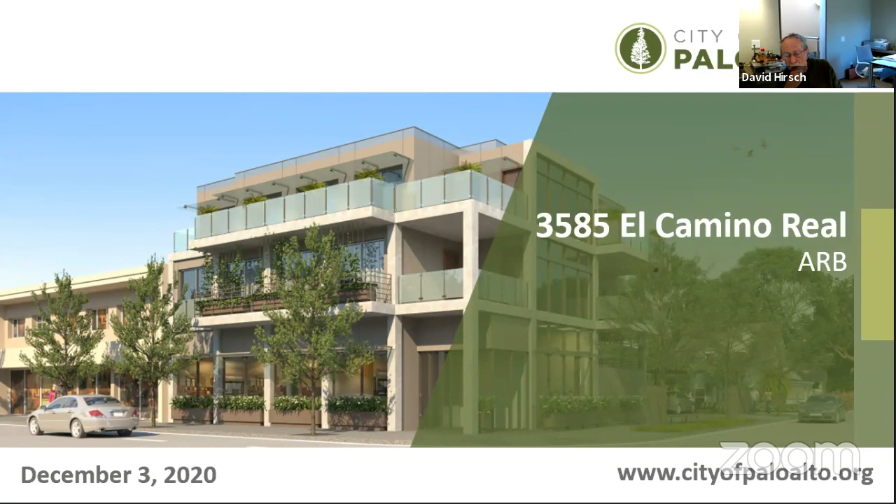Before we do that, I'd like to ask if we have any disclosures from any members of the board. Alex, any disclosures? No. David, disclosures? None. Grace, disclosures? None, except that I looked at the materials board at City Hall. I will disclose that I did spend some time visiting the site and also looking at the material board. Dave, Sheldon, please go ahead. Great, thank you for the introduction. I disclosed that I also visited the site again, and also the board at City Hall. Thank you, David.

Okay, great, so thank you. This is the 3rd time for this project before you, and what we're going to be talking about today is a formal review of a mixed-use project, giving a little background of how we got here, and then some of the changes that the applicant made at the recommendation of the ARB, and then our recommendation.

So the project is located on 0.14 acres, a corner lot at El Camino Real and Matadero Avenue. It's a new 3-story mixed-use building, zoned CN, neighborhood commercial. The project uses the housing incentive program. This will probably be the first project to be approved. You may be aware of another project on San Antonio, but that one needs the ordinance to be in effect, so this will likely be the first one approved using this incentive program.

Requests are for architectural review. The variance has been withdrawn because it's no longer necessary, and we'll talk a little bit more about that. The recommendation is for the ARB to recommend approval to the director.

A bit of background: the project has been before the ARB twice before, in October 2019 and recently in May 2020. Most recently, the ARB provided recommendations to revise the shading exhibit, considering all the trees that affect the shading for the parking lot area, including street trees; to review the size of a second floor 1-bedroom unit, which the ARB thought was too large; to demonstrate more about the base, middle, and top to be consistent with the South El Camino Real guidelines, particularly the top portion of the building; and to consider adding a landscape professional to the team.

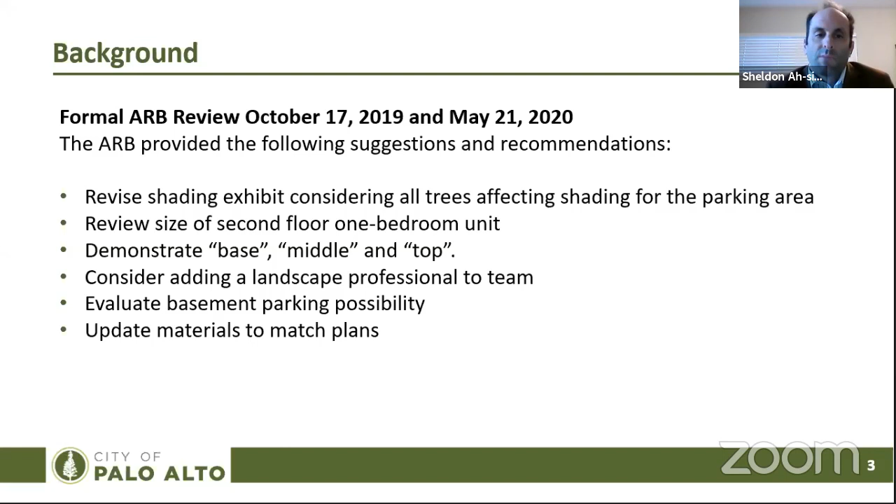Also to evaluate basement parking possibility, and to update materials to match the plans.

A little bit of site context. The site is again a corner lot. It also has an alley to the rear and some overhead utilities. The site is constrained in that manner with these streets. There's also residential right behind along the alley. It's an RM30 site, and in general you have a curb cut there in the front. Those would be eliminated as part of this development project.

A little more about the site context here. The area has a lot more older development, single to 2-story types. You can see another Quonset hut across the street from the project, and there's one also on the site that's partially dismantled. The site was an automobile repair area and was the location of remediation in the past for hazardous materials, which has now been given closure for the site by the county and oversight agencies. So this area, as you can see, is just an area that's maybe going to be in transition over time.

A little bit about the housing incentive program for residential mixed-use projects along El Camino Real, the CN or CS zone. The director may waive requirements if they're consistent with the architectural review findings. So the FAR maximum is not to exceed 1.5 to 1. The base CN in comparison is 1.0, and the maximum lot coverage can be completely waived, whereas the base CN allows up to 50%. So this housing incentive program is intended to produce more housing as an incentive.

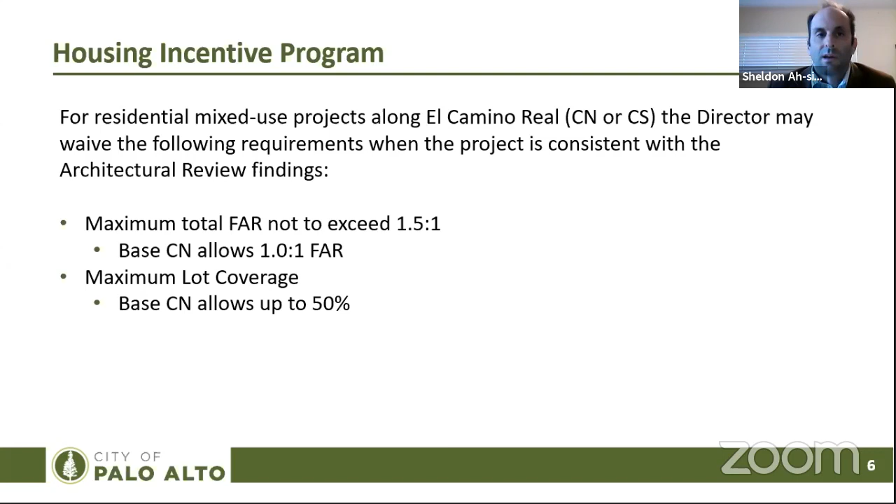For the proposed project, we're looking at a 3-story mixed-use building. The applicant has revised the project and proposes the following: some adjustment to the office square footage upward slightly, and adjusted the square footage of residential units down slightly, making that one large bedroom unit on the second floor a 2-bedroom unit. Also, the applicant added a parapet to address the top issue, and also revised the landscape plan.

So the project does include 0.41 FAR for commercial space and 3 residential units that have 0.71 FAR. So the total FAR is 1.12, just slightly over what would otherwise be allowed, but still under the maximums for the HIP. And the maximum lot coverage is 60%, which is a little over what the base would otherwise be.

Some notable development standards for the district: there's a 12-foot effective sidewalk for El Camino Real. Off the property line is actually about a 5-foot setback, but in total from the faces of curb there's a 12-foot sidewalk. There's also a 5-foot setback for the street along Matadero. That does push the property development envelope in a little towards the property. And then the open space coverage is 35%, as well as the parking lot shade canopy at 50%.

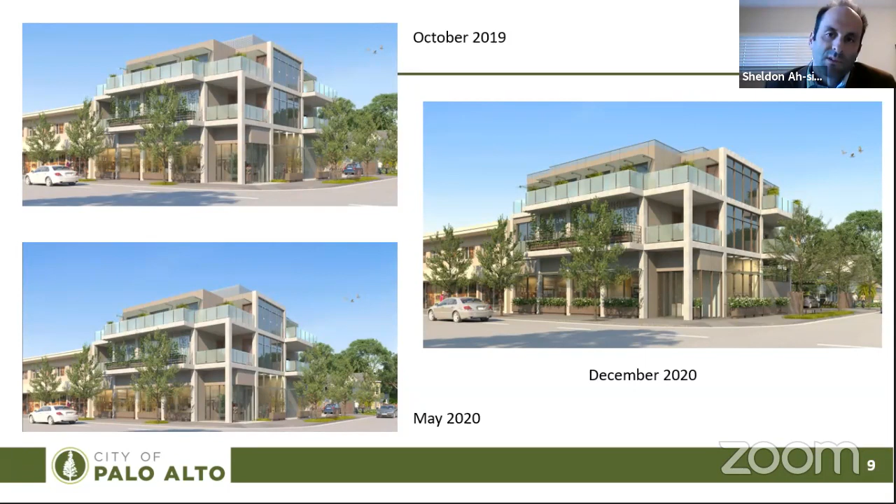This is from El Camino Real, and you can see slightly that Matadero elevation as well. The main changes here would be planters at the ground level, giving a little more base to the project, and then the parapet at the top, where they're using a brushed aluminum cladding. More along Matadero and the alley side, you probably see a little more change, but it's again the parapet and some of the landscaping along the alleyway, which has changed from the Japanese maples to the Western redbud.

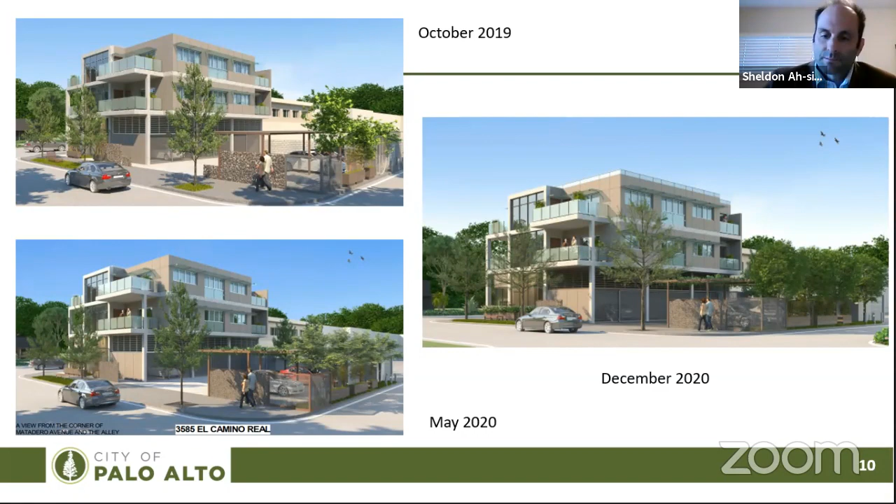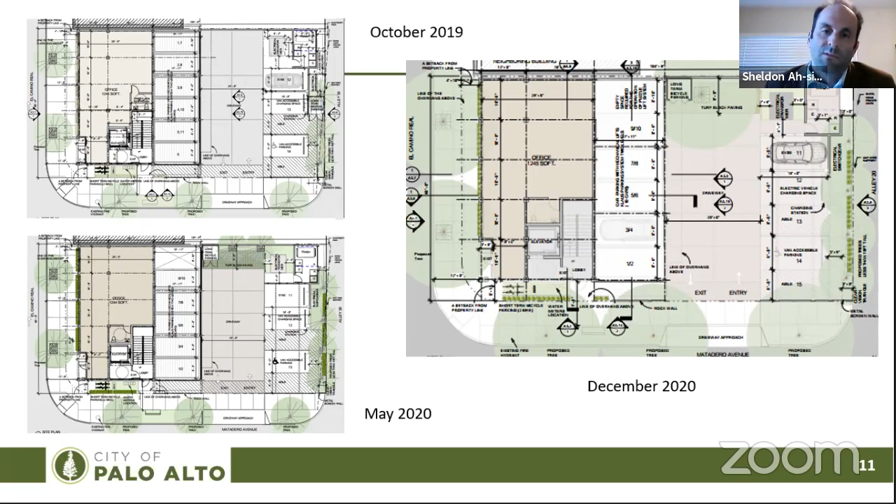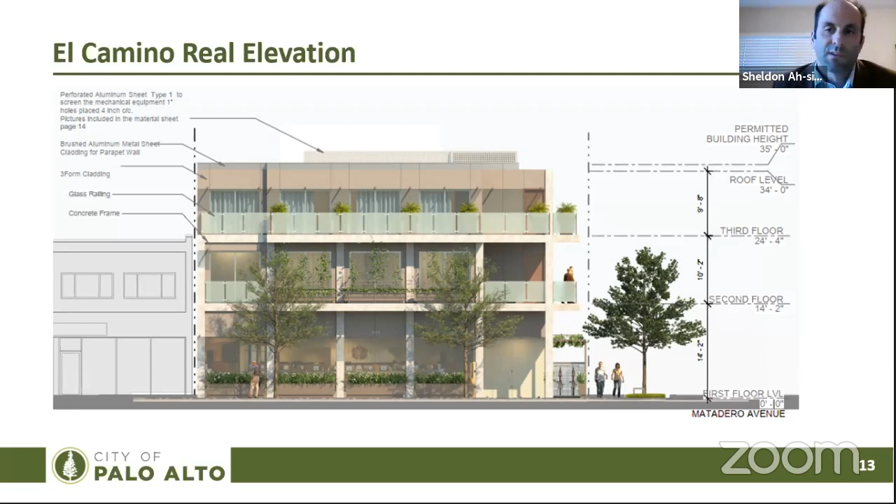Just going to the elevations and the planters at the base of the building here. This is along El Camino Real. You can see where there's concrete frame, glass railings, and 3Form cladding material. The applicant will go a little bit more into their design palette and design intent. Then at the top, you have the brushed aluminum metal cladding for the parapet wall and the perforated aluminum for the mechanical screening. So there's a lot of variety in different materials. We'll have certain slides on those in this presentation.

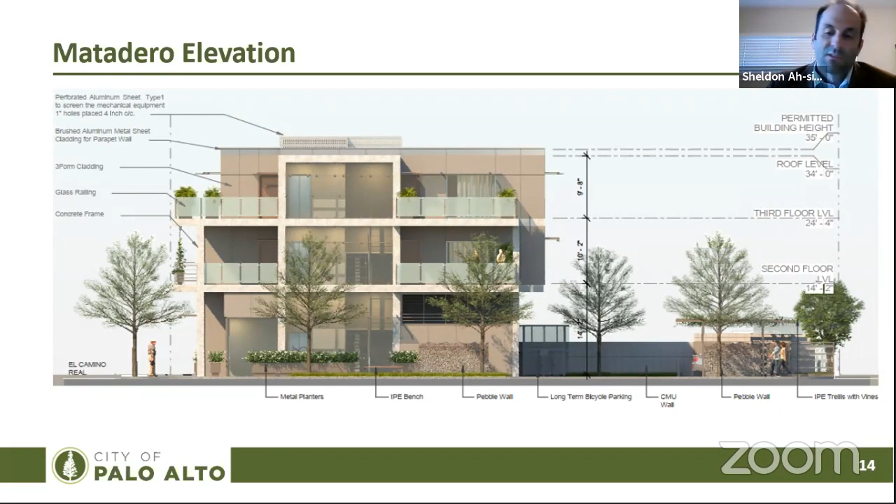Along Matadero continues that same type of palette there. All of this is within the 35-foot height limit. At the elevation here, you see that pebble wall introduced along the rear of the building and the screening of the rear parking lot area. You may also be able to see a little bit of the trellis covering the parking spaces in the back, which has some vines on it as well, trying to achieve that buffering between the property and the alley and the residences nearby.

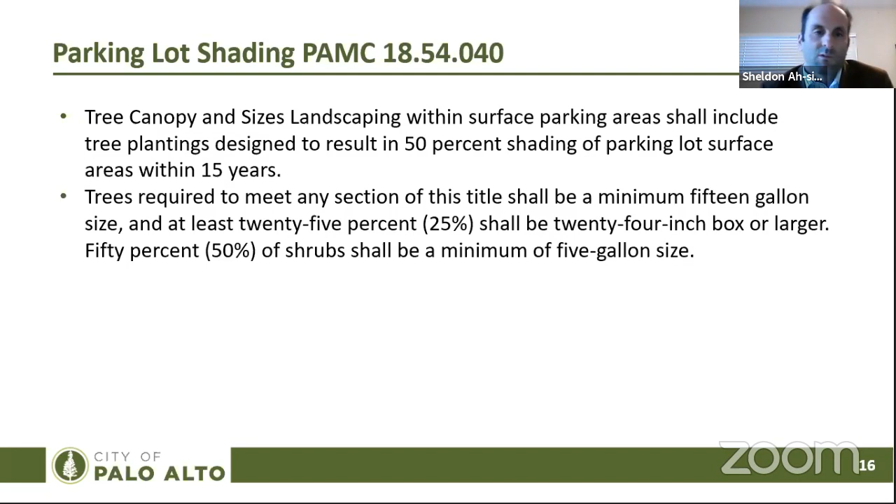One of the things that had to be addressed in previous iterations, having requested a variance, was parking lot shading. The tree canopy and sizes within a surface parking area shall include tree plantings designed to result in 50% shading of the parking lot surface areas within 15 years. There are certain criteria and requirements for types of trees that you can plant to achieve that.

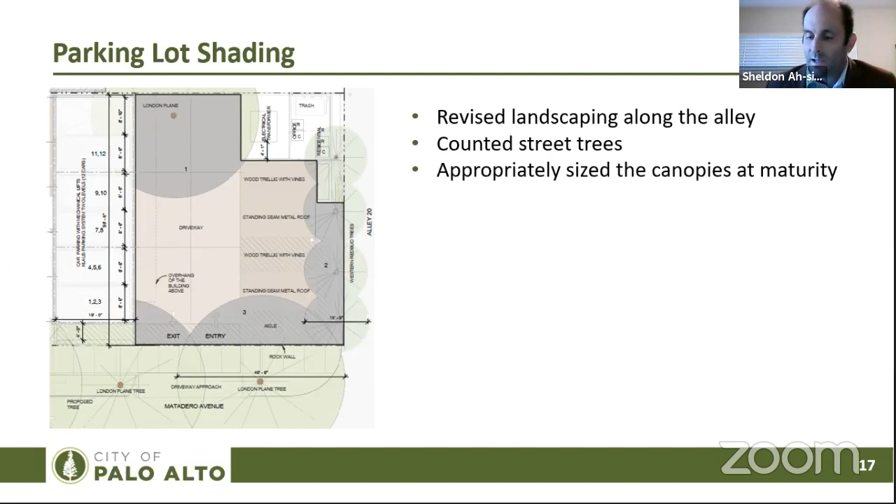What the applicant did, per the recommendation of the board, was bring on a landscape professional to have the plans refined, changing some of the trees in the back from Japanese maples to Western redbud trees, and also adding London plane trees, which have very wide, large canopies especially at maturity. When all this was put together, they did meet the requirement at 50.3%, just barely made it, but we did double check that. So no variance is required for this part of the project.

The other component here is the base, middle, and top, and this comes into play with being consistent with the South El Camino Real guidelines. The base of the building includes the office space, featuring landscape planters, some exposed concrete column frames with concrete slab and glass walls, and the floor to ceiling height is 13 feet.

The middle of the building includes a little more variety here. You've got exposed concrete frames, overhangs for balconies with hanging landscaping, and some solar screening, as well as a floor to ceiling height of 9 feet.

The top is residential use, and it features an 8-foot setback with a 4-foot overhang of the terrace. It includes three-form cladding and operable windows and doors. The very top includes a 1-foot parapet wall with brushed aluminum cladding and coping, and the very top of the roof includes mechanical equipment screened with perforated aluminum screen.

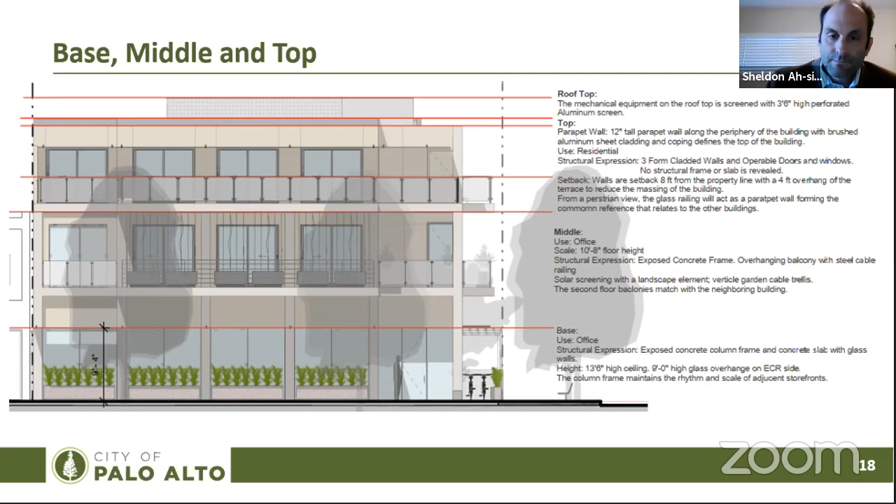One of the other topics was to look at whether or not you could put the parking underground. There's an attachment that includes some diagrams - these are some different diagrams, more detailed ones. The applicant, along the way throughout this project, has provided a lot of different iterations for this basement, addressing some of the staff's as well as ARB's comments.

As you look here, this site is 104 feet by 60 feet, and you have setbacks in the front along El Camino Real that need to be maintained. Those transcend not only at the ground level, but go down below ground when you're considering basement development. It also has a 5-foot setback along Matadero.

And then what can we do with it? Well, once you lay that out and try to fit, we can really just do a one-way ramp down. That's not the code. And in doing so, when you're making that turn at the bottom of that ramp, it's not possible without going into the setback. So that's another deviation there. You need another deviation to go into the street side yard setback.

And then once we figure this out, how to get into here, this area, where do we put the parking? They put a little example here of some stackers. These stackers, I think, are 9 stackers. It's very difficult to see how this would really fit. Maybe you could orient these a different direction. Then trying to get to the top level, you need to have an elevator and a stairway. They put that in the rear of the property.

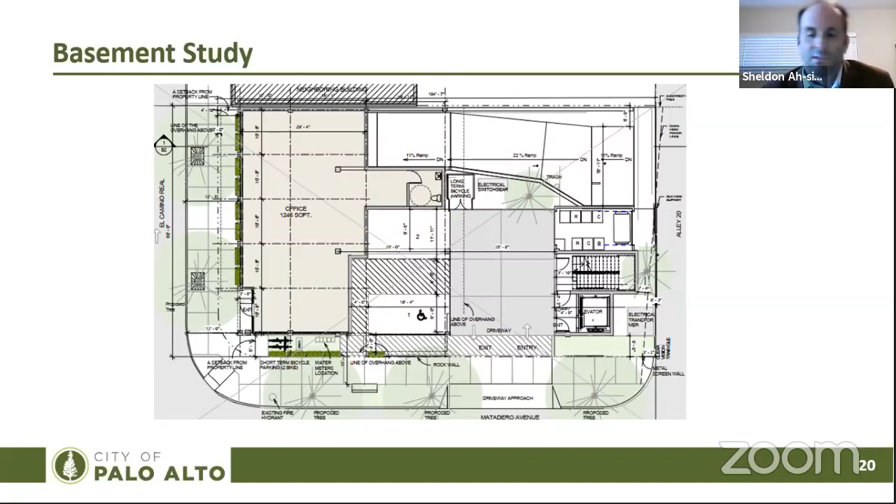And this is just the cross section of what that looks like. Maybe you can put some parking underneath the ramp. It's very limited. You have to put a pit to go down more. So there's just a lot of different things that make this not a feasible solution.

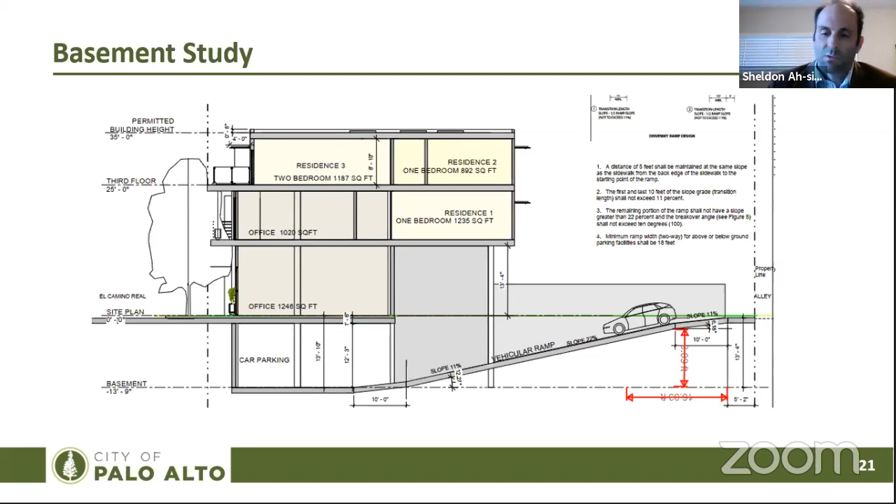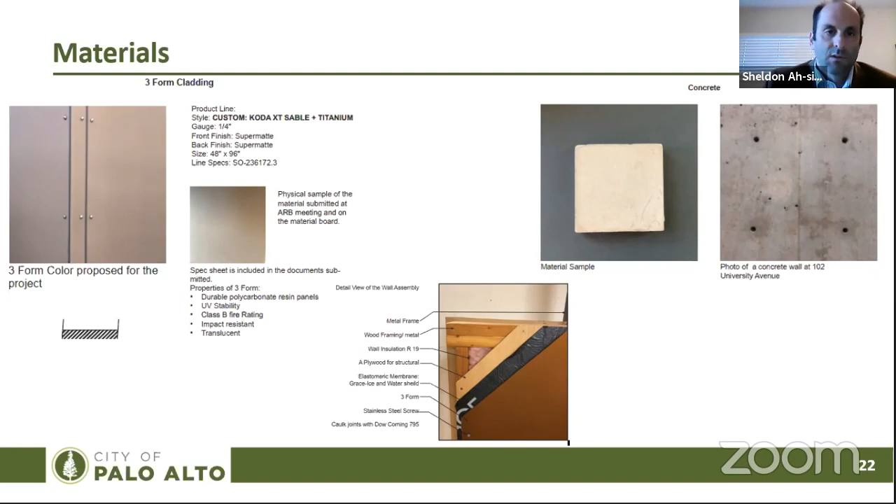Going into the materials here, and the applicant will go a little bit more into this, but just to provide it here, some of the different materials. There's a lot of variety being used throughout the elevations, as well as for the little details here, the glass railings, glass overhangs, and how that's attached to the building. The long-term bicycle parking has some stainless steel panels.

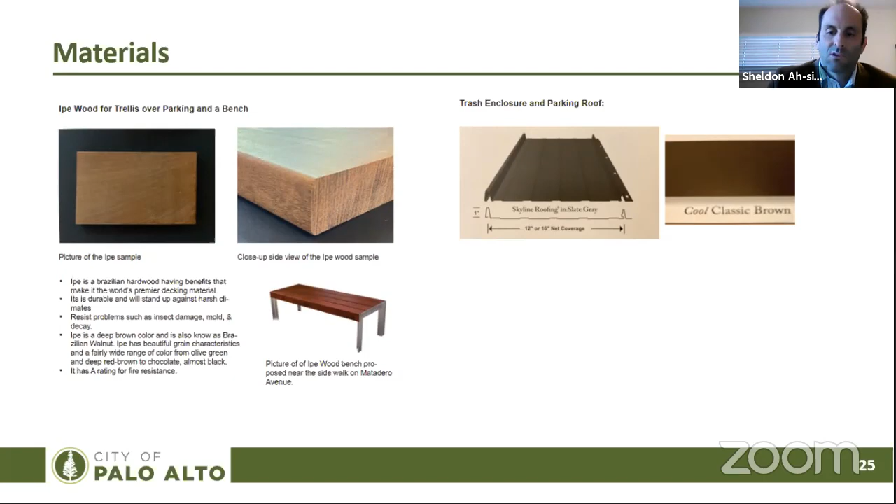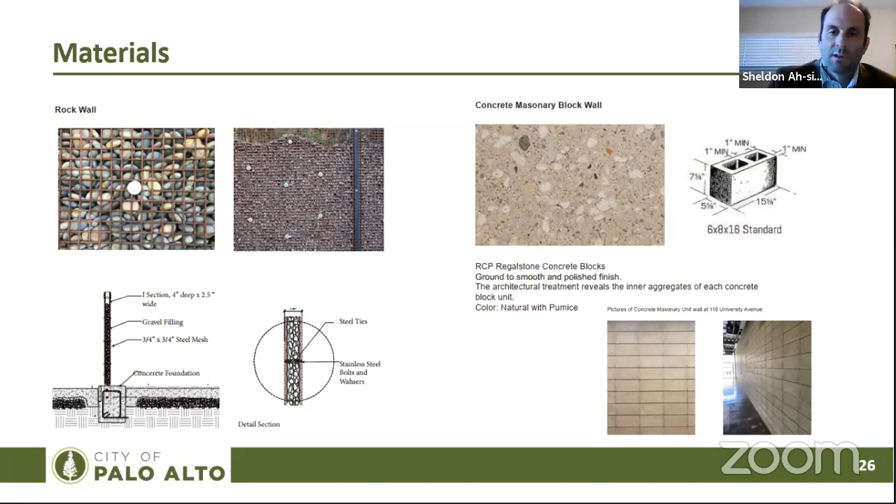There's wood that's being used as well for the project. There's a bench, there's a trellis, the rooftop has a metal as well as the trash enclosure. There's a pebble wall that's being used along the perimeter towards the rear and the alley of the building. And then there's a masonry block wall that's being used for the enclosure, the trash. The mechanical equipment is also screened. You can see how the holes are situated. So it should provide that screening so you won't be able to see the equipment. And the planters are the metal type of planters there.

So some other issues, miscellaneous, the below market rate housing, the project will make an in lieu payment. The mechanical lift parking, there's a condition regarding operations and maintenance. For CEQA, the project required a mitigated negative declaration that circulated earlier in the year. Some of the impacted topics included air quality, biological resources, cultural resources, hazardous materials, and noise. And there were mitigations that were proposed to reduce these impacts to less than significant.

So in conclusion, we want the board to conduct a public hearing. The project does respond to the ARB comments. The project is consistent with the architectural review findings. We do want to note that there's finding number 1 that we just want to make a change there. It's on page 19 of the packet. The sentence right before finding number 2, so it's the last sentence. We need to revise to strike out the last part of that sentence since the project does not require a variance. Project is consistent with the code as proposed.

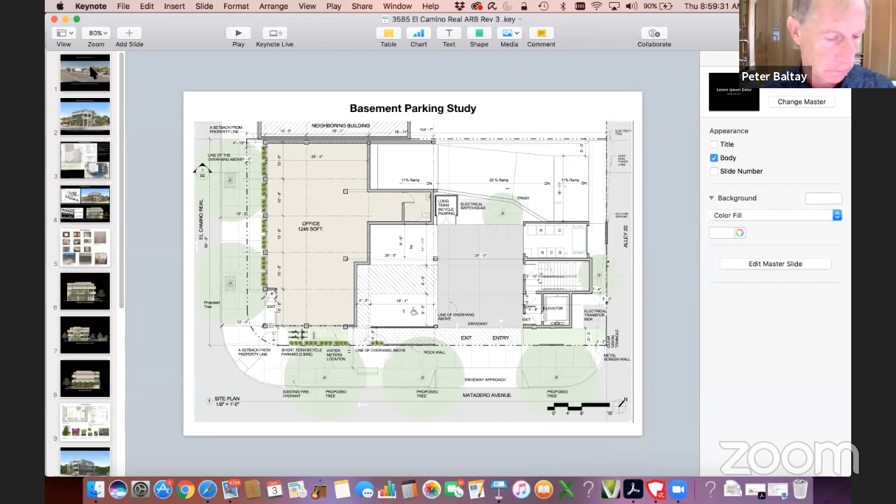Are you able to see my screen? We are able to see your screen. Please go ahead. My name is Pratima Shah, I'm the lead architect on this project. Good morning, Architectural Review Board members, planning staff, Jody and Sheldon.

Thank you for reviewing our building design proposal. We appreciate the thorough staff report and detailed presentation by Sheldon. This is our third formal presentation before ARB. We appreciate the review and comments. The revisions made to the design in response to these comments have assisted with building design enhancement. The project site has been vacant and in dilapidated condition for the last 30 years.

We, Paloma Architects, together with KSS Management, are proposing a 3-story mixed-use building with office spaces on 1st and 2nd floor, and 3 residences on 2nd and 3rd floor. There are 2 double-bedroom units and 1 single-bedroom residential unit. As you are familiar with the design proposal, I will focus my presentation on the revisions and responses to ARB comments from previous hearings.

First important topic is parking area shading. The revised design proposal has 4 western redbud trees along the alley and 3 London plane trees. These trees provide shading of the parking area and fulfill the requirement of 50% shading with trees. The project does not need a variance.

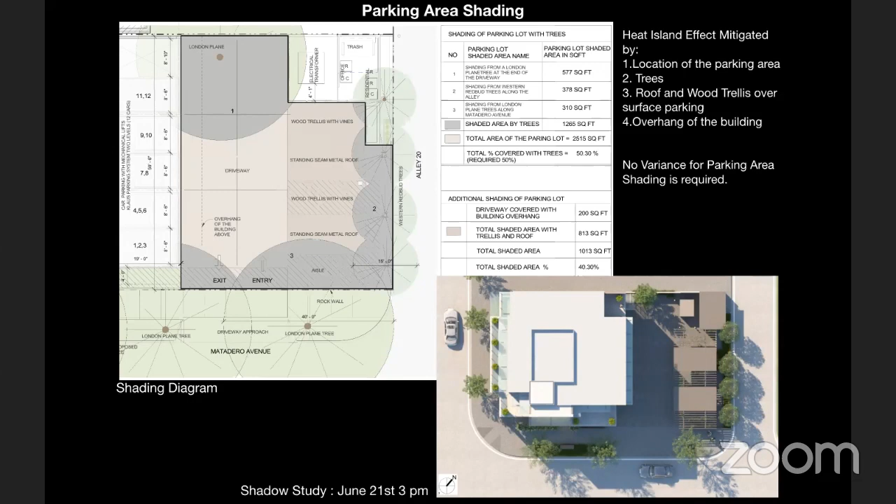Articulated facade. A 12-inch parapet wall has been added along the periphery of the building on the roof, cladded with a brushed aluminum sheet. The parapet with cladding defines and articulates the top of the building. Brushed aluminum panels have been part of the building material palette of this project, similar to 3-form cladding. The revision is aligned with Palo Alto Municipal Code and El Camino Real guidelines. The proposed building has a well-articulated facade with storefronts, glass overhangs, balconies, terraces, and operable doors and windows.

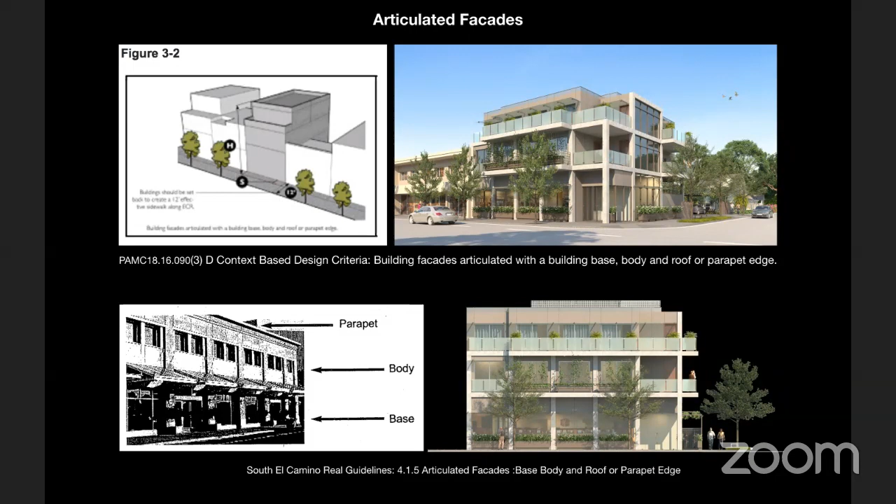The third floor walls have been set back 8 feet to reduce the massing of the building and complement the neighboring 2-story buildings. The building form also expresses the use of the space. On the ground floor, concrete columns and glass storefronts maintain the rhythm and scale of the neighboring storefronts. The second floor office space has a balcony with vertical screen garden, providing a beautiful view and shading. The third floor walls are recessed 8 feet, creating terraces for residential use and providing privacy for residential spaces.

Materials. A detailed material sheet, which includes brief specifications, material pictures, and construction details, has been submitted in the package. There is no change from the previous material, just an addition of aluminum sheet cladding for the parapet wall.

There are 2 different types of screens used in this project. The screen used for screening mechanical equipment on the roof is made up of perforated aluminum sheet, which has 1-inch diameter holes placed 4-inch center to center. This will screen the equipment properly. The other screen used is for bicycle parking and is made up of stainless steel with smaller holes and 40% openness. 3-form color samples and pictures are included, which are consistent with the colors in the rendering.

With this revision, we have submitted photorealistic rendered elevations that show the material color, texture, and its location in the building precisely. The next couple of slides show rendered elevations. The building has honest expression of concrete structural frame, and the palette is really minimal, with concrete, steel, and glass as main structural materials, and 3-form and aluminum for cladding.

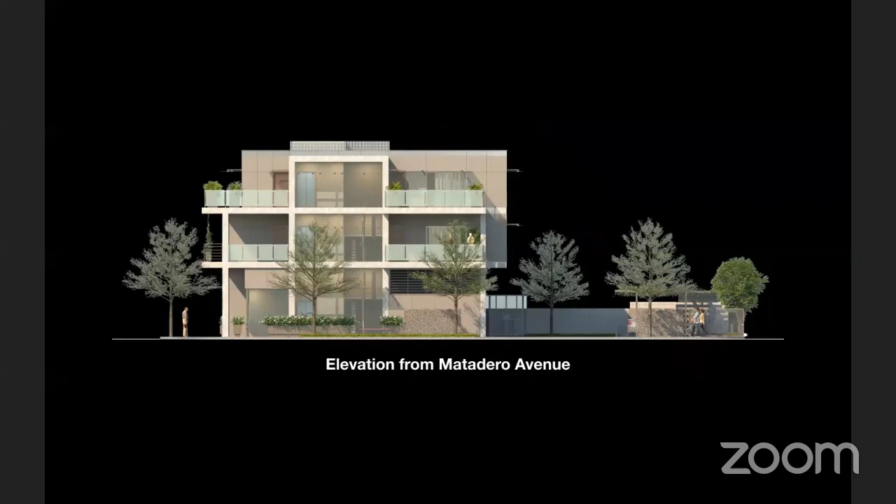Landscape design. The landscape design has been revised after consultation with architect Annie Huang. There is no existing tree on the sidewalk or on the property. We are providing a total of 5 London plane trees on the sidewalks and 1 at the end of the driveway.

Japanese maple trees have been replaced with 4 Western redbud trees, which are native, drought tolerant, and ornamental. They grow around 15 feet tall, satisfying the constraint of overhead electrical cables along the alley. A landscape planting strip with 4 Western redbud trees, shrubs, and bamboo planters along the alley acts as a buffer and screen between the proposed building and the residential apartments.

A vehicular parking area on grade is partially covered with Ipe wood trellis and flowering creepers, which will provide shade to the parked cars as well as create beautiful views for the residents and the neighbors.

Metal planters with African iris plant have been proposed along El Camino Real and Matadero Avenue. The planters with beautiful iris plant will enhance the pedestrian experience as well as provide a screen and a view to occupants. African iris is a drought tolerant and robust perennial with great aesthetic value and easy care.

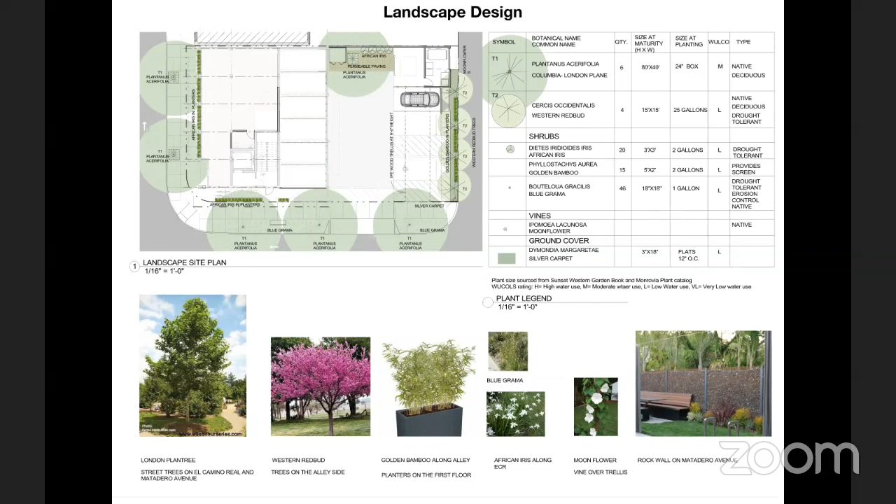On the second floor balcony on the El Camino side, a vertical screen garden has been proposed. A cable trellis system will guide creepers potted in the balcony planters. The creepers and cables will create a beautiful garden screen with an interesting view and make urban space more livable. It will also help reduce solar gain, mitigating noise and dust.

Most of the proposed landscape elements can be seen in the rear view from the corner of Matadero Avenue and the alley.

There is a little change in the program on the second floor. A 1-bedroom unit on the second floor has been converted to a 1,240 square foot 2-bedroom unit. 2 car parking spaces have been required for this unit in the mechanical elevator lift system.

The project fulfills parking requirements. Guest parking is not required, but a shared parking program can assist with guest parking for residential uses. The surface parking spaces allocated for office use can be shared with the residences after business hours for guest parking.

Regarding subterranean parking, a detailed study, a comparison of parking solutions, and multiple design options have been submitted to the planning department, including a 1-way ramp with stackers, a 2-way ramp with stackers, and a 1-way driveway with a jog.

Even with a 1-way ramp, the maximum permitted slope and 180-degree turning radius for cars could not be accommodated. Despite proposing a full 6,000 square foot basement, we were able to accommodate only 3 car parking spaces in the basement.

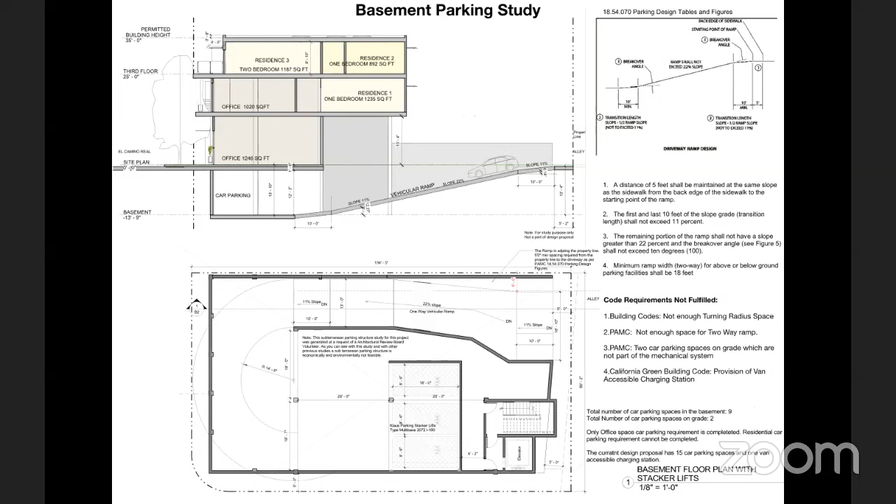Thank you, Pratima. Should I need to?

Good morning, ARB members. First of all, I appreciate the time that you spend. It's really well appreciated. I did 2 terms on the ARB, and I think it's very helpful.

Let's see. I've designed a few hundred thousand square feet of buildings, commercial buildings on El Camino, as well as major downtown Palo Alto buildings. I've designed shopping centers. So we have a wide range of projects we've worked on.

But it gives me immense pleasure to present a mixed-use building on this 60-foot micro site. Most of you understand that is the size of a single-family residential site in Palo Alto. The project has, as I mentioned, a small site, and we did have remediated soil that is cleaned up now. The site is clean.

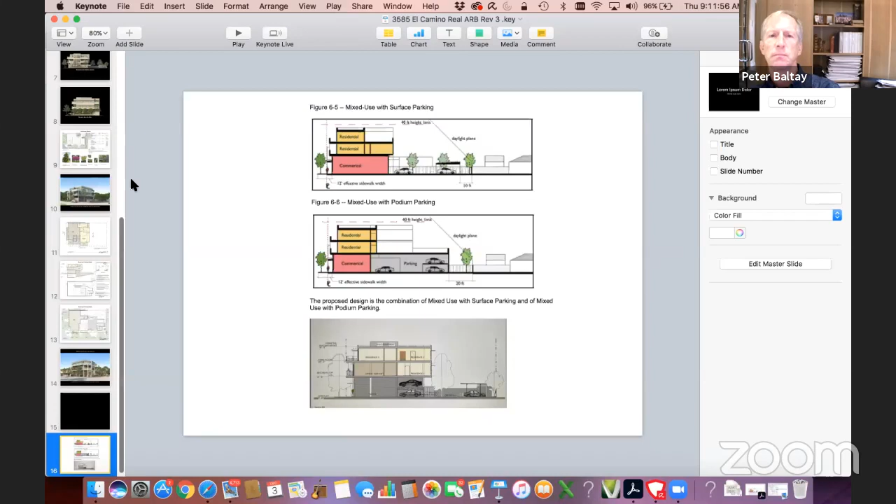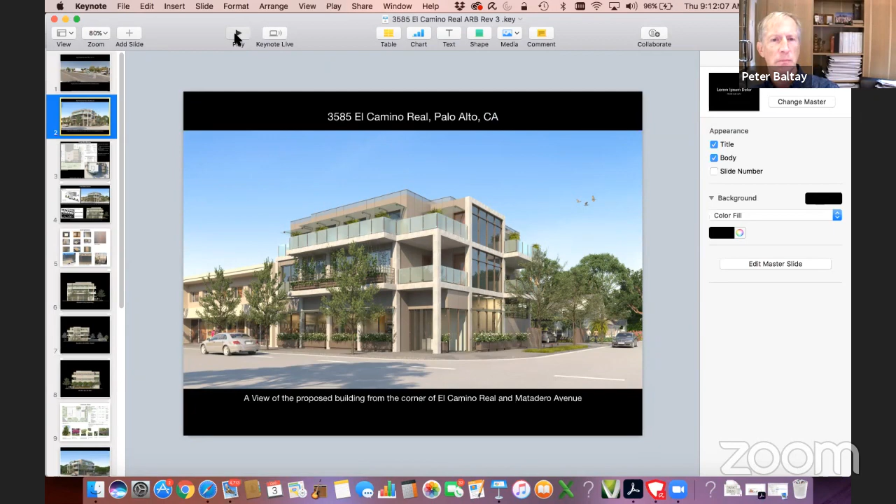Jody briefly steps away and returns, confirming the request to read Ozma's comments into the record. She locates the email Ozma sent to Jody Gerhardt that morning and prepares to read it.

Jody reads Ozma's comments: on this project, the design is lacking granular detail and warmth. The effort to articulate the top of the building through a change in material on the parapet is ineffective at defining the top and appears slightly out of place. A change in plane could bring more definition but might also clash with the language of the rest of the building.

The top story appears as one big wall element without much relief and could benefit from a material or textural change across the whole top story, since altering just the thin silver band of the parapet doesn't help the scale of the building overall. Similarly, a change in material for one of the stories, instead of the same material on every floor, would reduce the monotony of the mass. For these reasons, Ozma could not make finding number 2 and would not recommend approval.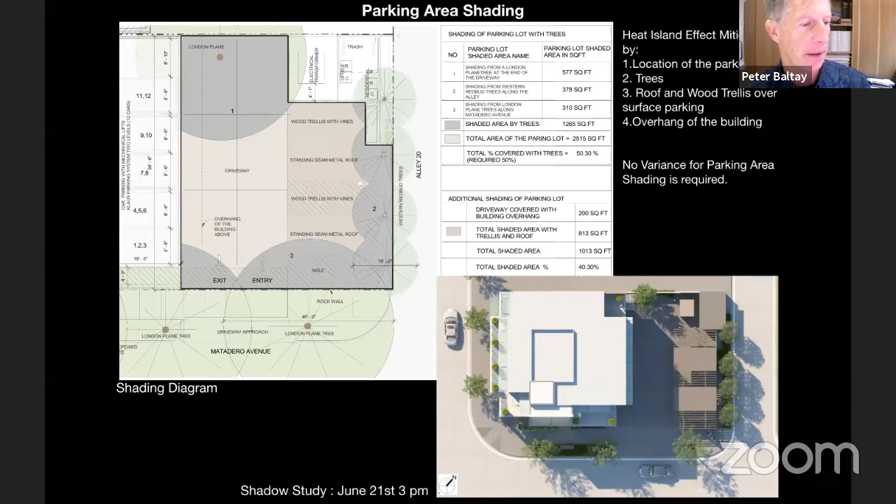Chair Baltay? Yes. Is it possible to ask the applicant where they think those closets may go? Because I think if they're interior, that would be fine for staff to handle, but we wouldn't want them maybe changing the exterior windows.

Let's come back to that though, see if the rest of the board has any concern about it even, because I don't want to drag this out if it's just my thing. The closets themselves are not our concern. I'm bringing it up just because Alex had mentioned, I think appropriately, that the proper unit size would require an extra parking place, which they seem to have accommodated.

My other thought is to really address the issue of base middle top. That's something we've all been discussing and thinking about. At a high level, I think this building exemplifies why it's important in our objective design standards that we have some way to evaluate buildings without such a rigid criteria like a base, a middle, and a top. This is, I believe, a building that fits in well with its environment and the streetscape on El Camino, and is clearly well articulated and beautifully designed.

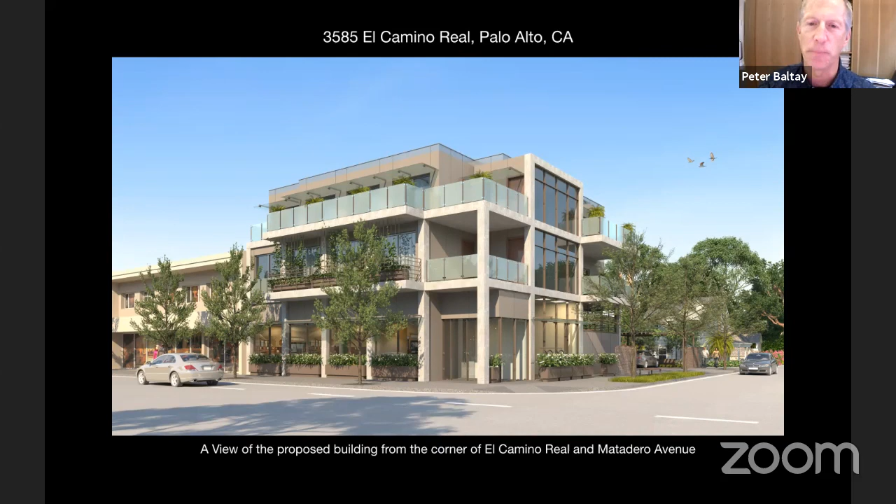But I don't believe it has a base, middle, and top of the formal traditional sense. I don't think the one-foot parapet screen on the top can really be called a parapet or a top. It would need a lot more planar definition to really make it do that, as Osma pointed out. However, the real purpose behind the base, middle, and top is to ensure buildings have sufficient articulation and really to help them relate to other buildings on the street and in the plane.

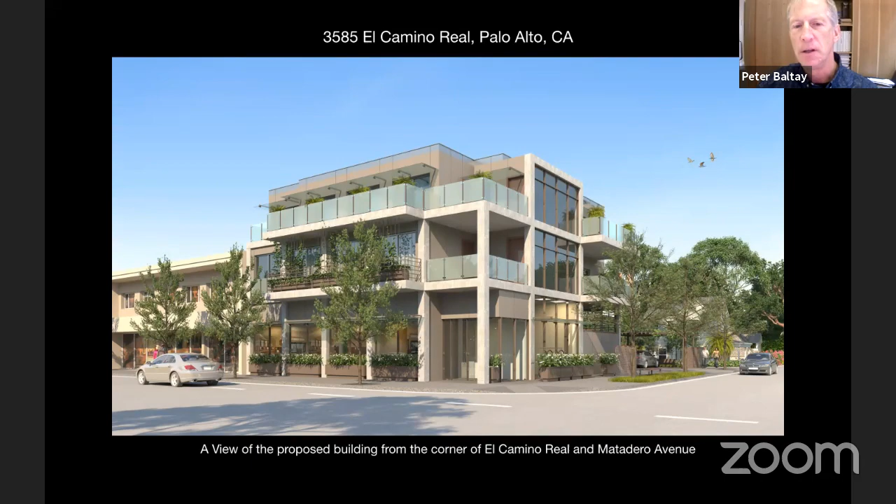I think this building, by setting the concrete frame, relates to the rest of the buildings along the street, and it just fits right in with my gut feeling of Palo Alto. You can see Joe Bellomo's been around a long time, and he gets what El Camino looks like, and the building fits. It just goes right in there with the way the frame is done.

And I think that does the purpose of the parapet. Really it's the second floor overhang with the glass wall, I think, is the top in that formal sense, and the upper piece is recessed back. Clearly the building is well articulated with the openings in the frame, the ins and outs, and the way the doors are put at the corner.

So I can support this building as meeting the intent of the South El Camino Real design guidelines, and I can support recommending approval. I do support Alex's request for a subcommittee to review a few of those items. With that, David, why don't you speak?

Okay, thank you. Sheldon, that's a very nice initial presentation. Congratulations to the client's method of describing it this time, very succinct and to the point on every item that has been raised, including your latest presentation, which is also complete. I have to take a different tack because Grace stole every thunder from this descriptive part of the project here.

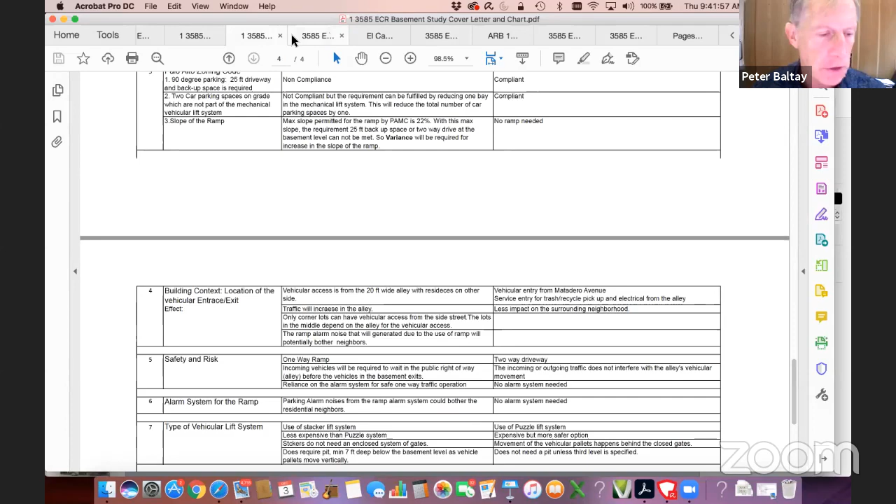I'm open to the subcommittee approach. I'm also open to coming back to planning staff to review. But it sounds like in this group, there's a move towards the subcommittee approach. David, what's your opinion about the items Alex suggested?

I've been pretty happy with the degree of detail on the project as it is. If there's one or two that Alex feels strongly about, certainly I have no problem with it coming back to committee.

Let's be clear about the point I brought up about the closets and the layout. My concern is not whether they even have closets or where they come from, but rather if they come back with a change on the floor plan, what should staff do? At what point do they come back to us or to a subcommittee? I think it's incumbent upon us to give them clear guidance, especially since my guess is they're going to make a change on that sooner or later.

So we could bring up the plans and ask the applicant for some opinion. But if we were to say, look, any change that affects the positioning of windows, then we want to see it. And we don't want to see the parking count reduced, even if they cut back a bedroom. Is that a fair statement to leave as the position of the board? Grace, what do you think?

Well, I think it's not really within our purview. However, planning staff would definitely come back to us in any case, right, if elevations are changed.

Well, we're just trying to make it easier for them so the guidelines are set. That's why I'm bringing it up. I could go along with the statement that if there's any change in elevation, it should be brought to our attention somehow, if that's a motion you would like to make.

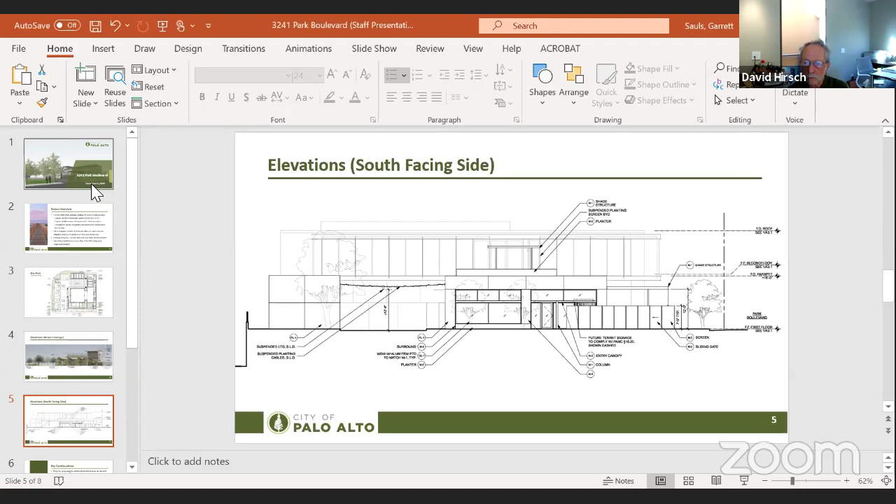Good morning, board members. My name is Garrett, I am the project planner for this application. The site is 3241 Park Boulevard, an existing building that is being partially torn down and remodeled, adjacent to the Fry's Electronics site within the future North Ventura Coordinated Area Plan area. The project is proposing a 2-story R&D and office building totaling about 7,861 square feet.

They'll have 2 parking lifts with a total of 21 spaces, basically bringing the site into compliance with our code requirements. In addition, they'll provide 5 bicycle spaces on the site with 4 long-term spaces and 1 short-term space. The proposed landscaping will provide at least a 55% canopy over the parking area, exceeding our 50% requirement over the next 15 years.

The site, given that it was previously used as an auto service facility, had some chemicals that had intruded into the ground as a result. A soil investigation included in your packet demonstrated that a soil vapor mitigation system would be required. Staff has been in communication with the applicant, the Department of Toxic Substances Control, and the Regional Water Quality Control Board to start that process and get the necessary documents prepared once this project is approved.

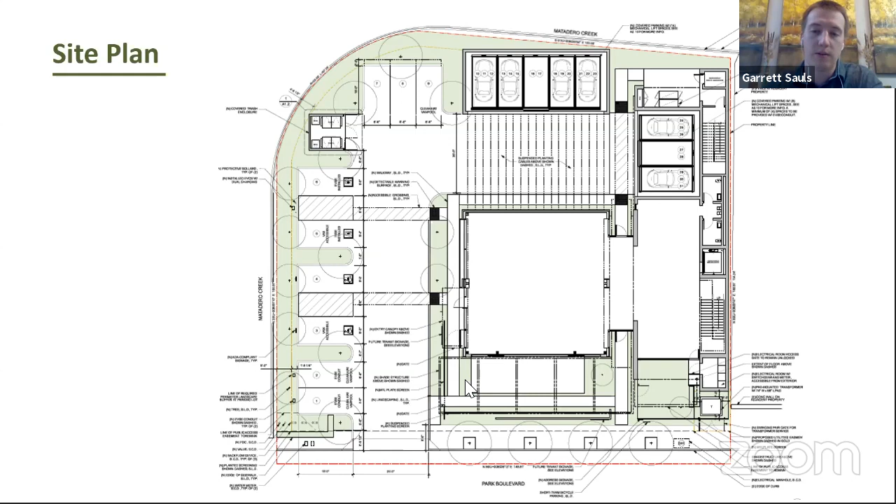On the site plan, you can see the 9 parking spaces along the street at ground level, plus the remaining 21 spaces in the 2 parking lifts along the side. This front area is a gathering space for the tenants of the building, shrouded by a planter wall. You see a smaller planter below, and further beyond it this planter wall, which screens it from view while also providing space for air flow so it doesn't become a stodgy area.

So while it may seem at this point it's further away, if you come 3-dimensionally towards it, or have that structure moving closer, it would actually get a little closer to this retaining wall you see along the left-hand side. You also see here they have a proposed second floor amenity area.

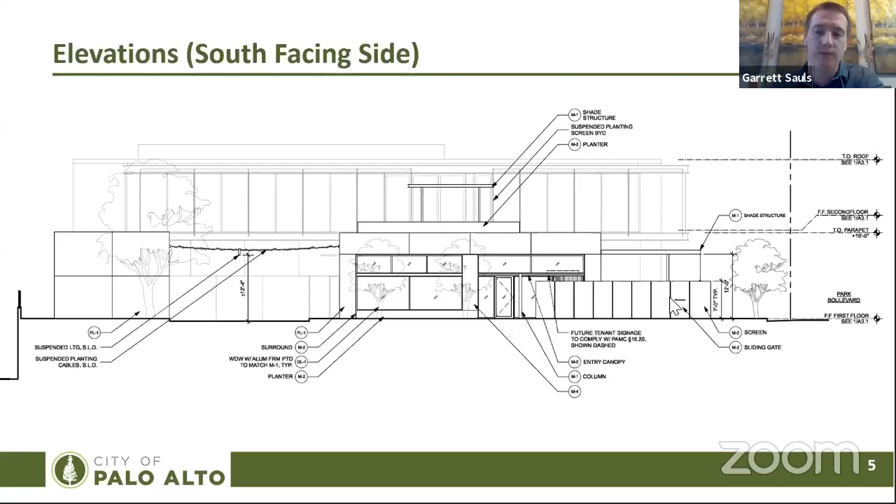Some key considerations for the project: there are currently 3 existing street trees on site, which they're proposing to remove and replace with 20 trees in total. They would be exceeding the urban forestry requirements for tree replacement, while also placing a majority of native species on the site, which you'll see on the landscape plans submitted in the staff report.

In general, the project is well composed and designed. There was a portion along the southern wall facing towards the substation that staff wanted the ARB to weigh in on, to say whether they felt that area needed any additional treatment, or if the design proposed is sufficient.

The reason for them having a 2-story wall is fairly understandable. They have an adjacent substation, which is not necessarily the most appealing thing to look at. So the applicant has indicated their intention is to screen that facility from the tenants' view.

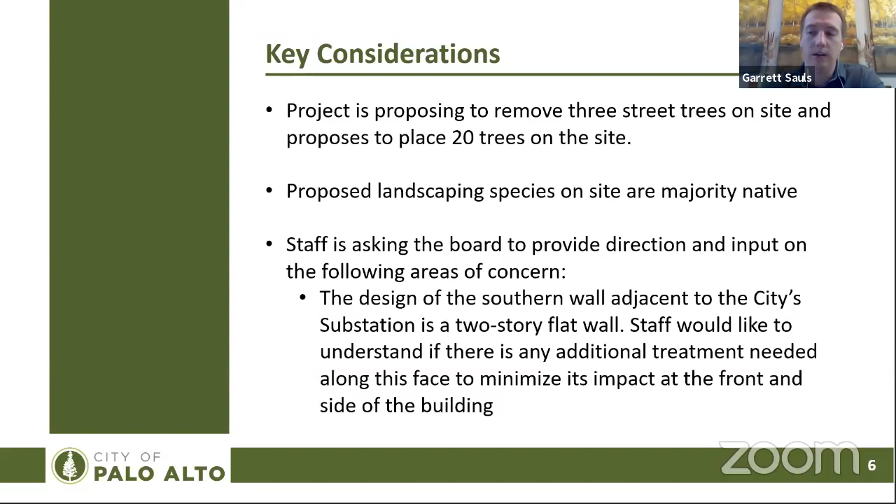As you all had mentioned, this is an example of the material boards. They are proposing to use a smooth-trowel integral cement plaster along the wall, along the majority of the building, while also utilizing painted metal to help break up the massing of the building, and clear glass along the site to give it an openness.

Lastly, staff is recommending the ARB recommend approval of the project and provide any direction they feel is necessary. And that concludes my presentation.

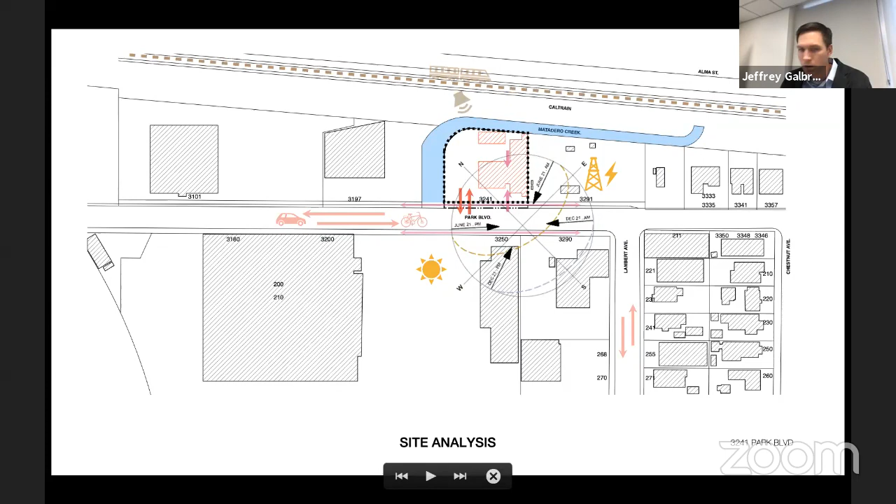In terms of zoning, the site is zoned GM, as are the adjacent parcels to the north along Park Boulevard. The Fry's site across the street is RM30, and kitty corner to the site on the corner of Park and Lambert there's a CS zone parcel, as well as the parcels on the north side of Lambert. Transitioning south from Lambert begins the R1 South Ventura residential area, so we're a bit of a transition point.

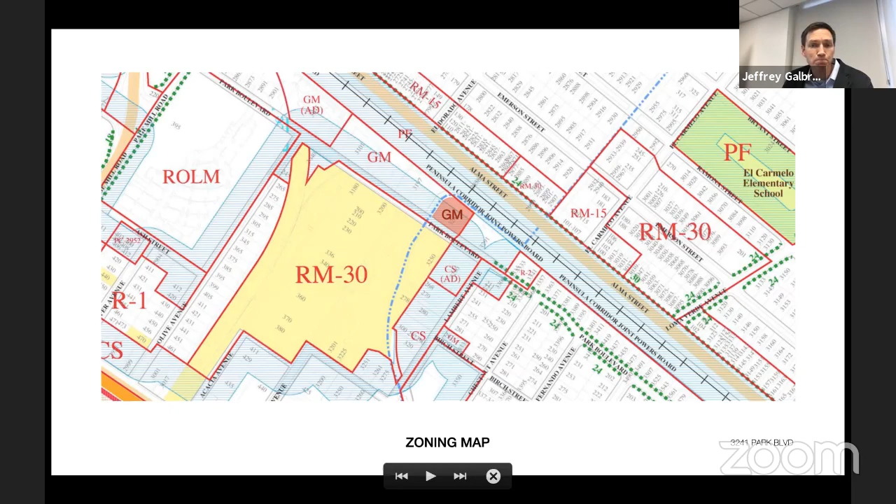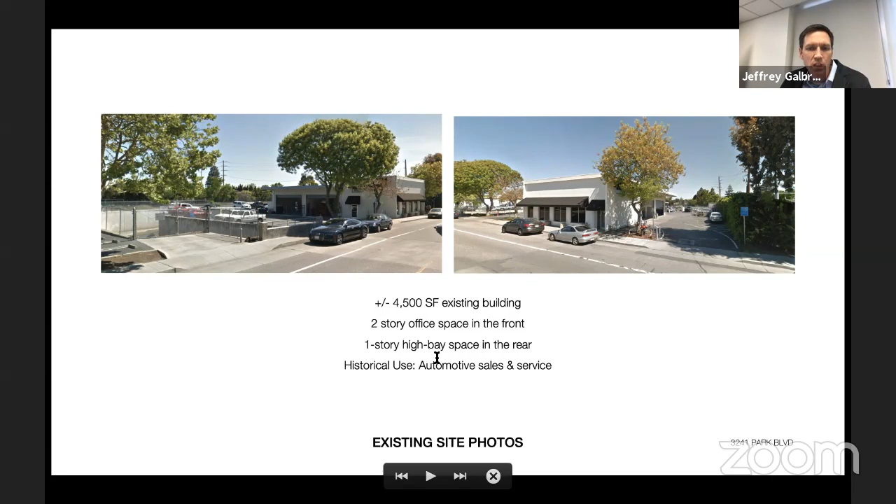The existing structure is about 4,500 square feet. About the rear two-thirds of the footprint is high bay space, single story, and the front third is two-story, where there's office space that supports the use. The historical use is automotive sales and repair.

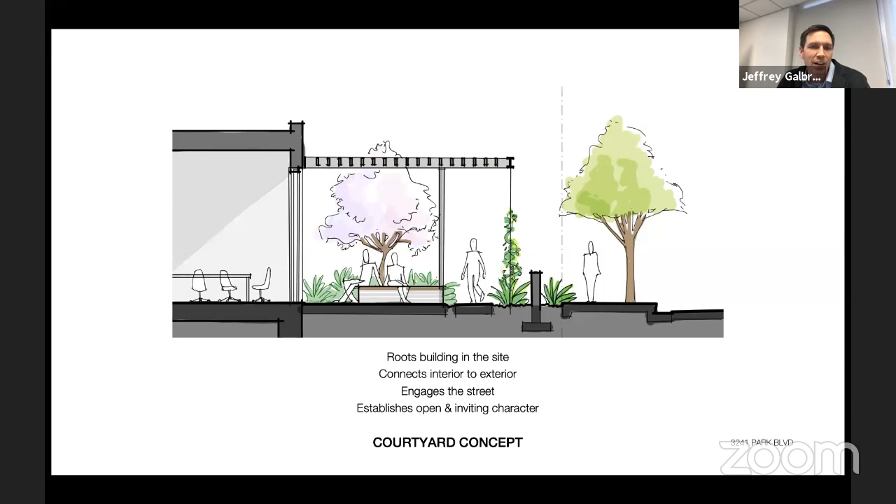We took the feedback to heart and completely reimagined the building. At the heart of our proposed concept is the idea of a courtyard. A lot of the comments we just ran through had to do with how the building related to its context in the neighborhood, and we feel like putting a courtyard at the center of the concept really solves that. It roots the building to the site, connects exterior to interior spaces, engages the street, and establishes a very open and inviting character to the project.

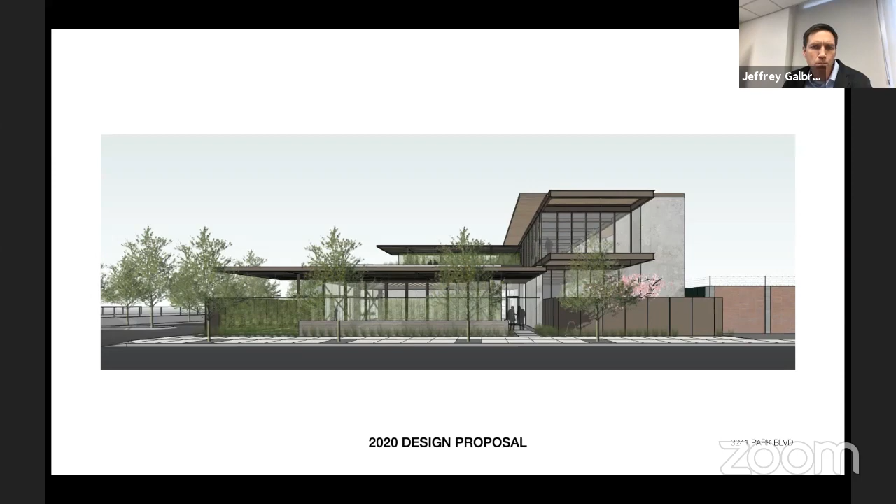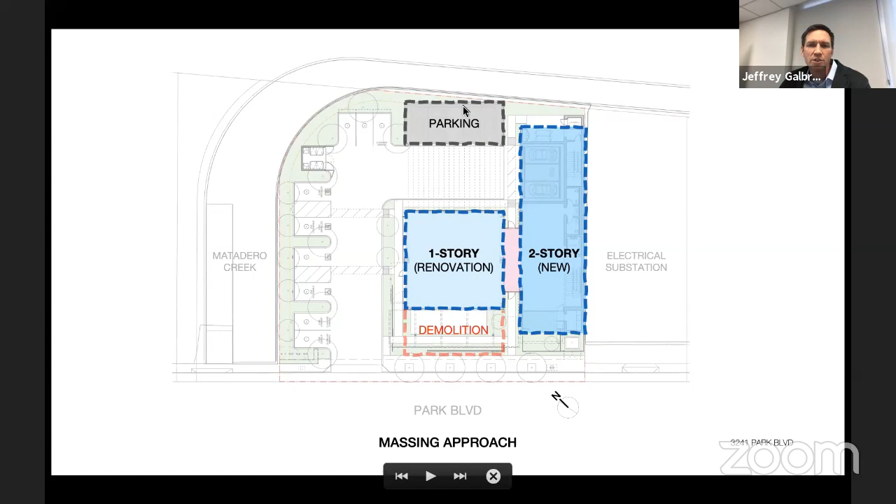Again here, the demolished portion of the existing structure is replaced with a courtyard that really connects the use back to the urban environment.

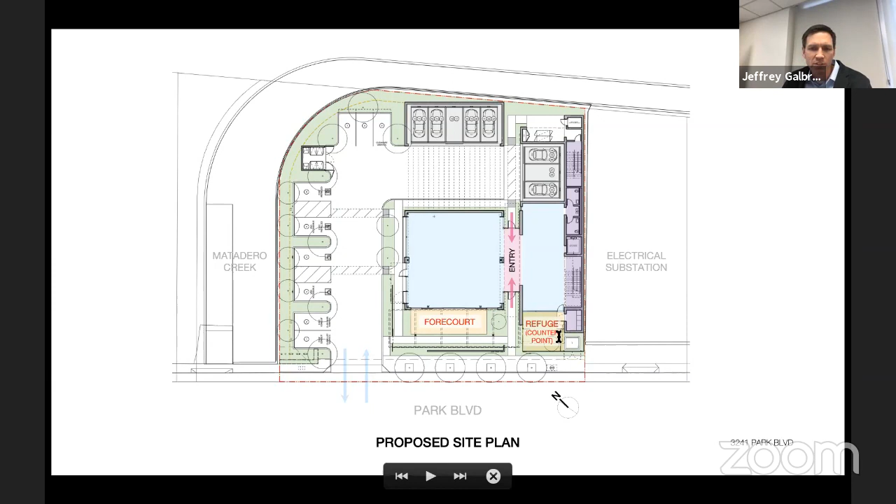A little bit more granular look at the ground floor. The purple area off to the right is where the services are located—electrical, stairs, bathrooms, and so forth. Blue is occupied space. In addition to the main courtyard, we also have a counterpoint secondary outdoor space, which is more of a contemplative, inwardly focused garden we call the refuge.

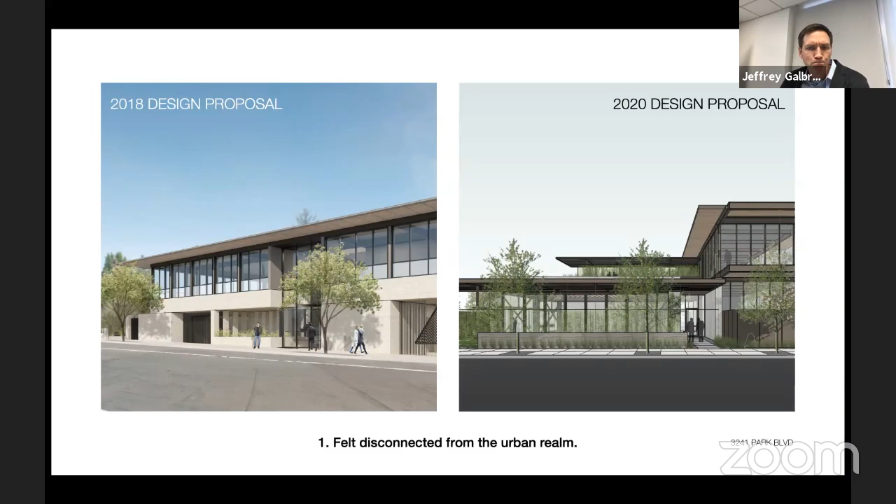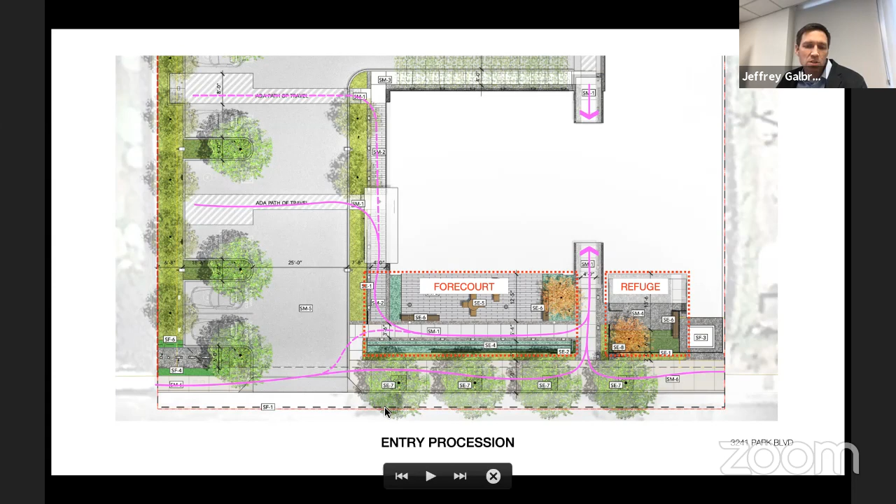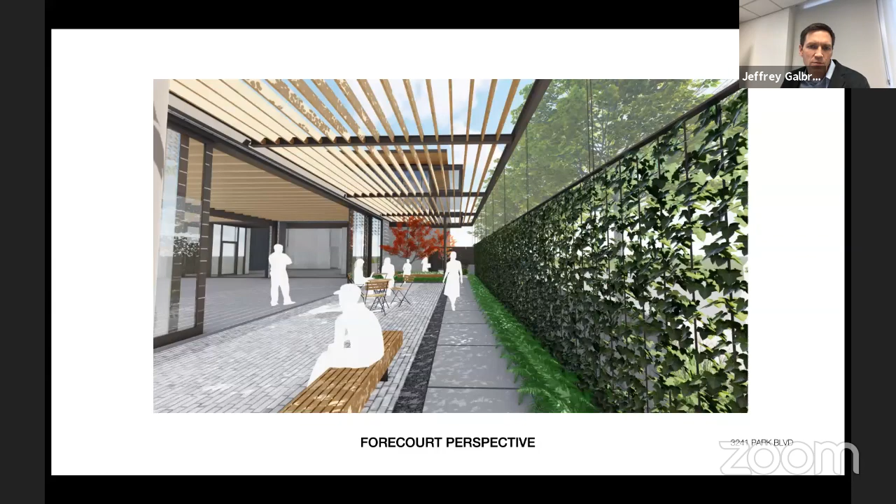Here's a few views of what that might look like. Here you've parked your car and you're looking back towards the building. Here you've entered the forecourt, and here you've turned the corner and are facing towards the main entrance.

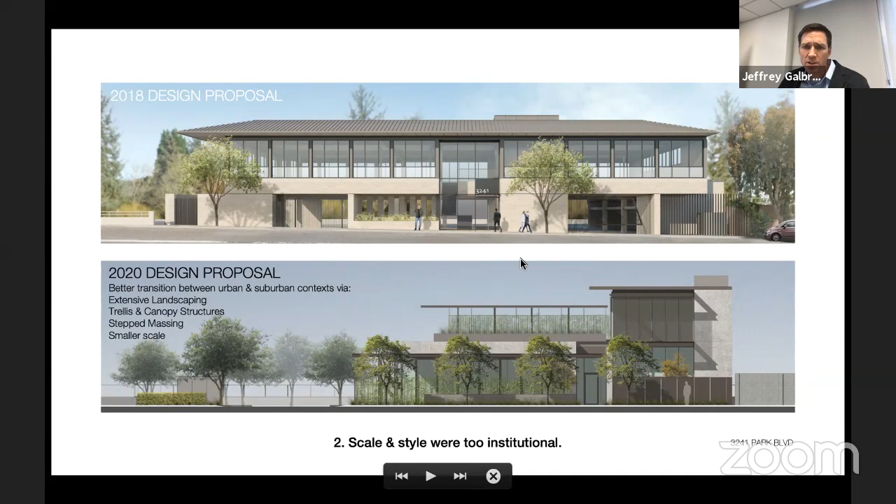So the second comment we received was about scale and style feeling a little too institutional. We feel like the current proposal does a much better job of transitioning between the urban and suburban contexts. It does that through extensive landscaping, the use of trellis and canopy structures, stepped massing, and just overall smaller scale of the project. We've reduced the project floor area by about 25% from the previous version.

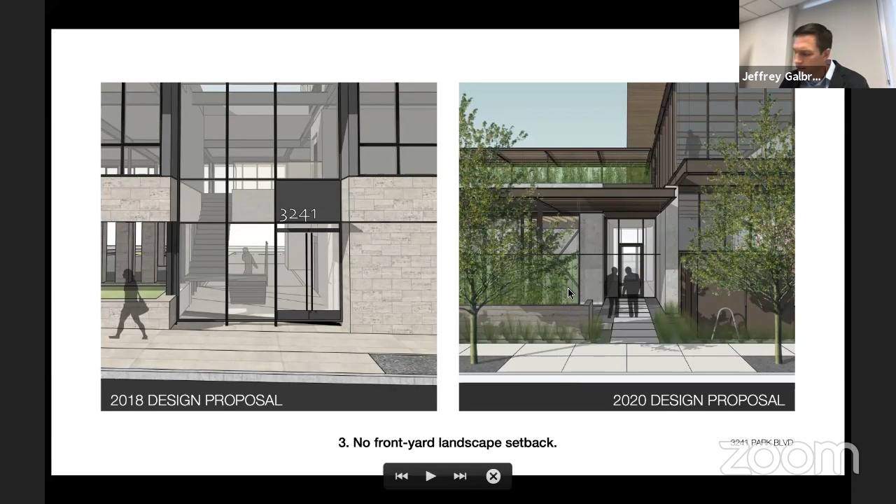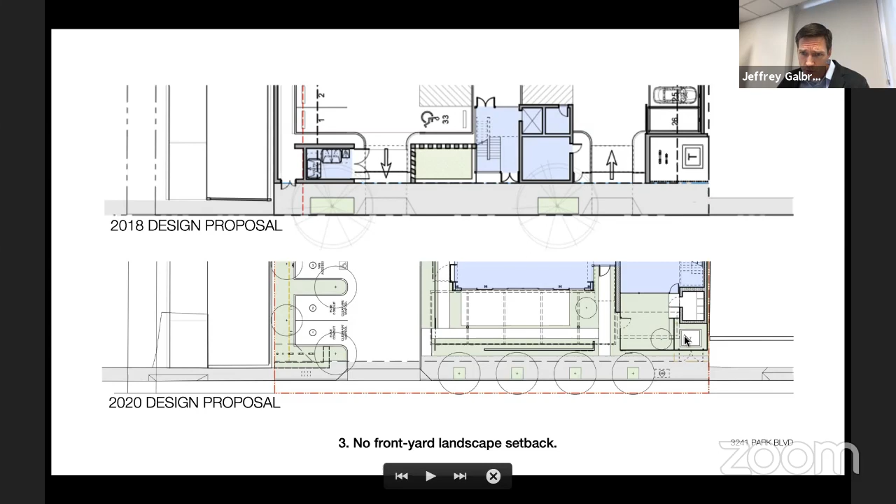And in the site plan, you can see as well, whereas the previous project was right up against the sidewalk, we're now set back 10 to 30 feet, depending on where you are on the site.

The fourth comment was that we have this tall wall shielding view of the Matadero Creek. That's been eliminated. We're now just proposing to keep the existing fence and instead buffering that edge with trees that does a nicer job of improving views from both sides.

And the last comment was regarding the curb cuts. Previously, we had left the 2 existing curb cuts in place, and in the current proposal, we're consolidating those into one, which has less impact on the pedestrian experience.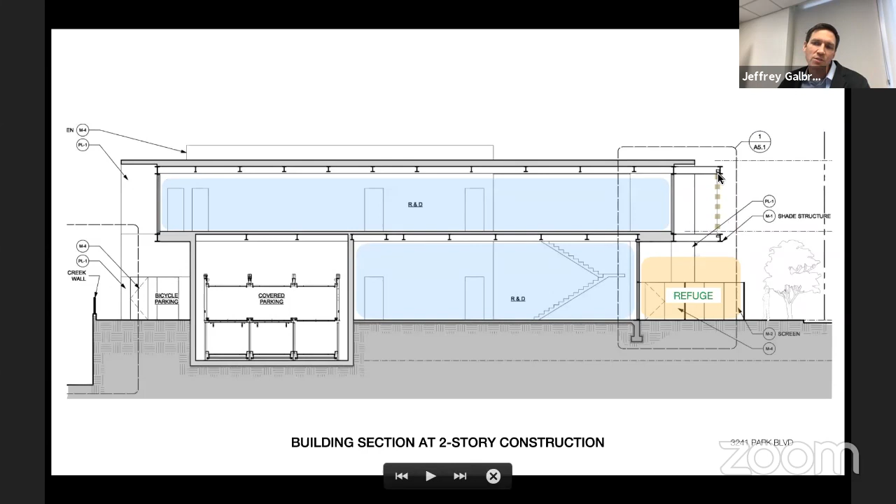Section through there, you'll notice here a dashed line off to the right. That's indicative of motorized sunshades that can be deployed or retracted around those glassy facades. Here's a view of what that terrace might look like.

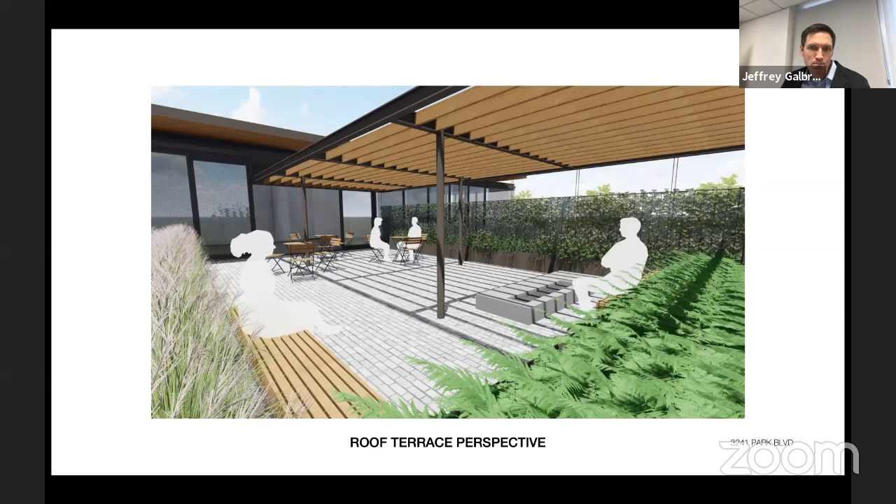Some precedent images that inspired us as we developed this concept. And I will leave you with a few perspectives of the project. Again, here looking from Park Boulevard with the shades at the second floor deployed, and here retracted. A view from the south, and a final view from the west, looking back towards the building. Thank you.

Thank you very much, Jeff. Do we have any questions for the applicant from any members of the board? Peter, if I may, I mean, it's up to you if you think appropriate, but I thought it would be nice to hear from the applicant regarding what the staff had directed our attention to, the two-story flat wall. Would it be okay to just hear their thoughts? Please, go ahead, but maybe formulate your question carefully. This is a question for staff or the applicant? No, for the applicant. Okay, why don't you go ahead and ask them?

Thanks for your presentation. Could you please just speak about your thinking and design of the two-story flat wall? I believe that's the south, facing the city substation.

Certainly. So currently along that edge, there's an existing fence along that side that's probably about 10 or 12 feet tall or so. And within the substation, there's also a lot of vertical elements that carry wires. So there's not a lot of visibility on that wall. We've talked about different options for how to break down the scale of it a little bit, whether it's a combination of joints in the plaster, kicked around the idea of is it an appropriate place for public art. So I think we're open to options to some extent, but also recognizing that it's not going to be a very visible element.

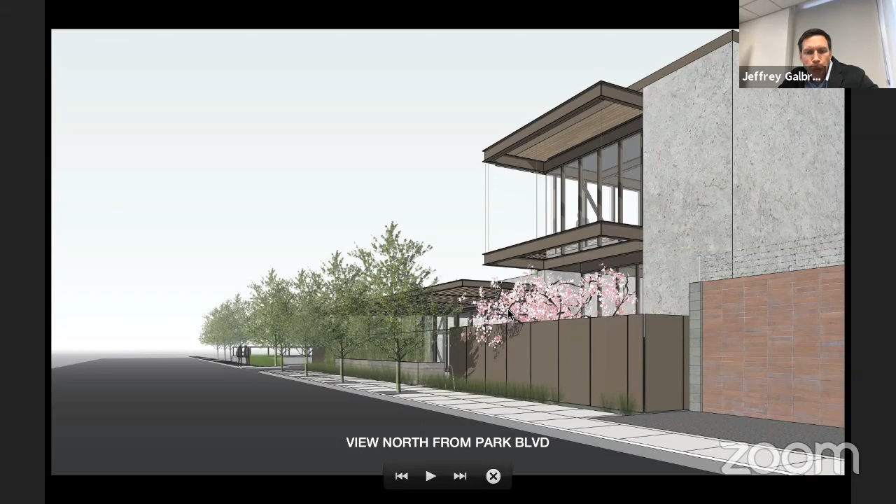I asked that question because on two previous Hayes Group projects, we've ended up seeing - one of them, on the corner of Lytton and Waverly, the building came down completely to a slab and was then completely rebuilt, yet we were told it would be remaining. Then on the Mills Florist project, as we all know, that's been quite an issue, but again at that point we were hearing exactly the same thing about intention to preserve. I wonder if it wouldn't be better to get some real engineering input as to whether that can really handle the new seismic loads and the new loads of that roof deck above.

Or if it will end up just being torn down to a slab again and starting over, and if that affects things. But that's the second half of my question to staff - is there any zoning or entitlement benefit to the applicant for keeping that existing building? I just don't want to see us get in a position like the whole city is with the Mills project, where it's incredibly controversial now that the building can't be saved, and yet what do we do?

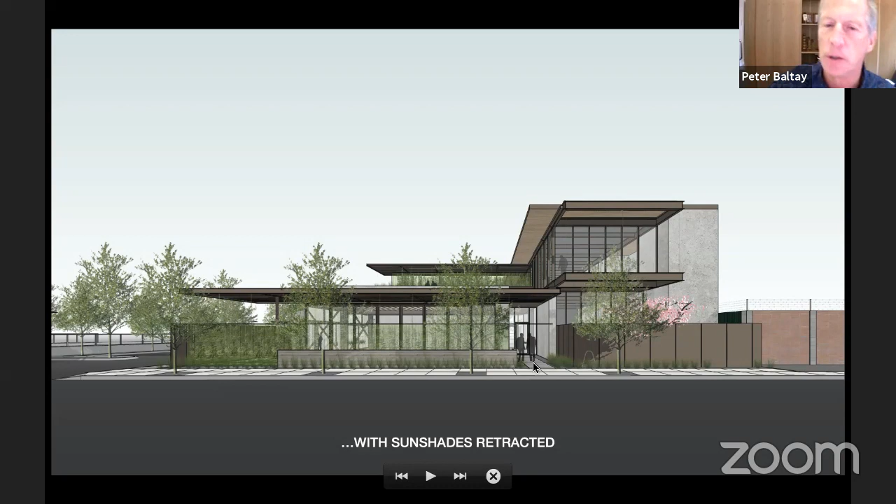Jody or Garrett, can you address that please? There is no benefit that's being afforded to the applicant for retaining the existing building. Typically what we're usually seeing is kind of a tear down of everything and scraping the site and rebuilding it, but that's not a requirement for people to follow, at least as of yet. So overall, their proposal is going to be consistent and meet the minimum requirements we have for parking, for floor area, for canopy, for landscaping - kind of anything in the code that we would be applying for a new building, they are going to be consistent and compliant with those requirements. So there's nothing like additional floor area or relaxation of any sort of regulation that is afforded to them by retaining the building.

And does that apply, Garrett, as well to environmental impact reports or studies? Yeah, it would similarly apply. We looked at basically the whole site with our exemption document as if there's going to be effectively some kind of new building, whether it's part of it existing and the other torn down - there's still going to be a lot of work done on it. So it doesn't kind of cut off the threshold of what we are looking at because someone's keeping some of the building.

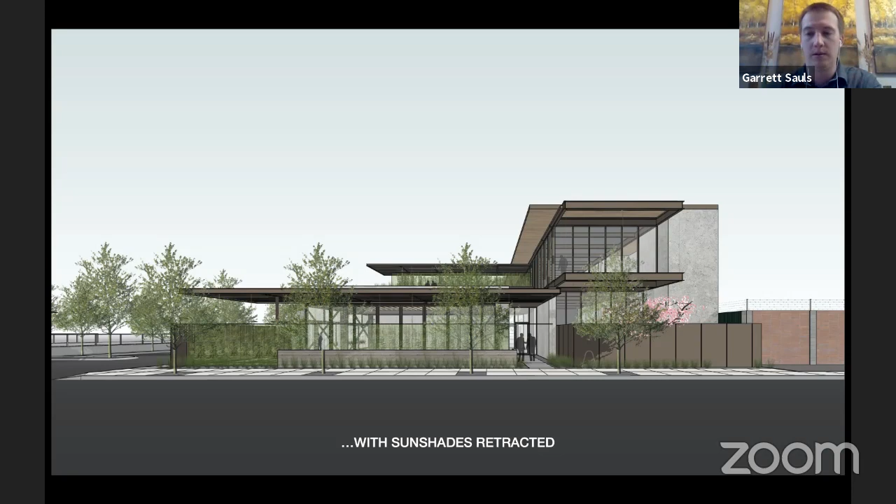Wonderful, thank you for answering the question.

With that then, do we have any members of the public who would like to address us on any item here or on this item? Do we have any speakers, Veronica? No, currently no raised hands. Okay, so then we'll move on from that and begin our own deliberations on this.

As earlier, Jody, could you or someone please read the comments Osma Thompson emailed in? Again, Osma is not voting today, but I'd like her comments to be read into the record for everyone to hear.

Board Member Thompson's comments on this particular project were that aesthetically the project is very handsome, providing small scale details in the soffit and trellis locations, except for the wall facing the substation - there could be more done here to break up this long blank facade. The applicant should also show this in context when we see this again. The protruding shading element is unusual, and its relationship with the overhang is also unusual, but aesthetically and proportionately it seems to work with the rest of the building. While the rest of the building looks great, that blank wall is significant enough that I would not recommend leaving it to subcommittee, and at this moment it is the only thing that would keep Board Member Thompson from recommending approval.

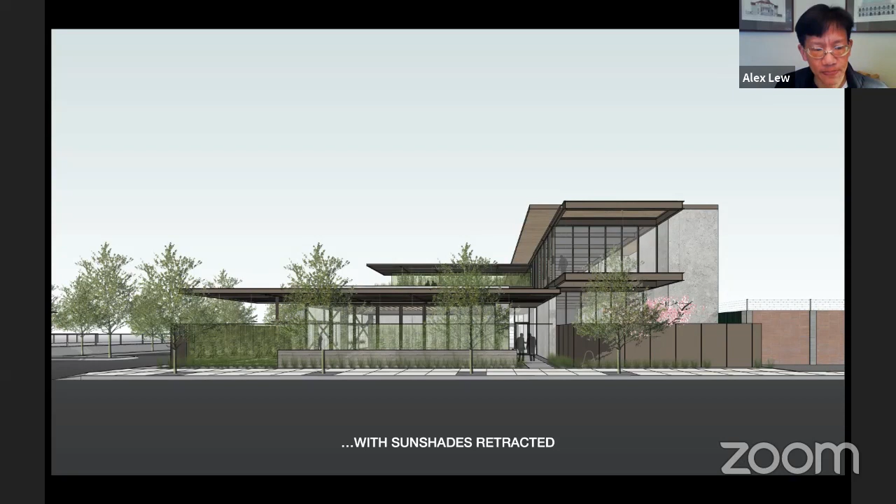Thanks, Peter. Great, thank you very much, Alex. Dave Hirsch, how about you step in this time ahead of Grace?

Just to get it out of the way, because that electric yard is filled with kind of unusual equipment that we don't always see. It sits up kind of like a sculptural element in that lot. It certainly would be better if there were more done with its perimeter, but you're kind of seeing that wall with that equipment in front of it, so that becomes a sculpture against which the wall is seen.

It isn't really sculpture, but it's interesting looking, and I think it relieves the wall. In fact, I think the wall being there is a really interesting contrast with the elements in that space. But that's not my main concern. I'm only mentioning it because it will undoubtedly come up again in our discussion. Thank you very much for the presentation.

As an advanced schematic, it has all the elements we need, in my opinion, to review the project. I say this because it deals a little bit with the necessary details. It deals with the landscaping, et cetera. It really is a quite complete schematic idea.

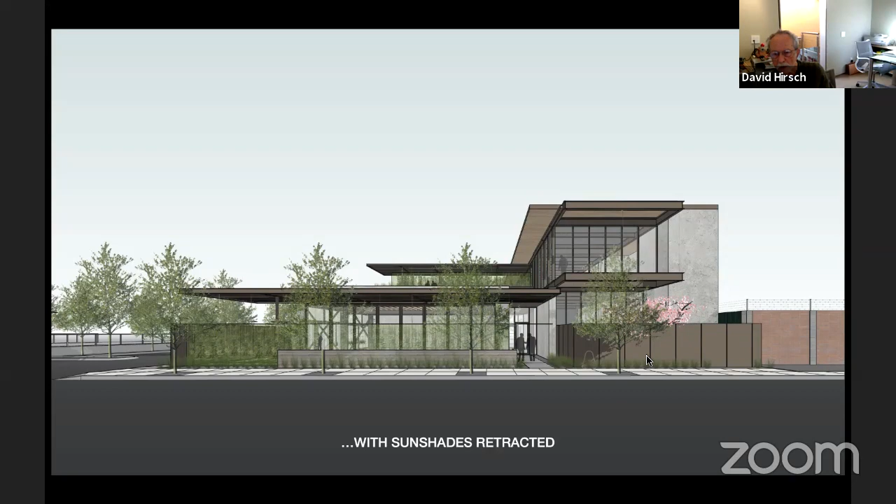I'm very intrigued and happy with the method of the material usage here. Thank you for showing that, with that exposed steel element. But if you go back to that, can you go back to that?

I really don't understand this interconnection up here. This is really open to the sky in some way, and it's a strange connection at that end. I really feel if you had the roof line extending out over that, you could work with that corner and make it a better expression.

That's my feeling—if you're really noting this and you rotate around the building and see that cantilever of the roof line from the opposite side, it doesn't work for me. I think I'd rather see the expression of the cantilevered upper section of that roof.

But even as an advanced schematic, I would recommend that any further issues could be discussed in committee, and I'm certainly prepared to approve this project. Even as a small office structure, this is a significant addition to the lexicon of high-quality buildings in Palo Alto. It is true to its function, sensitive to its detail throughout, even as a renovation. Thank you.

Thank you, David. We may well come back to having the applicant address this cantilevered element for us, but let's hear what Grace thinks about the project first. Grace?

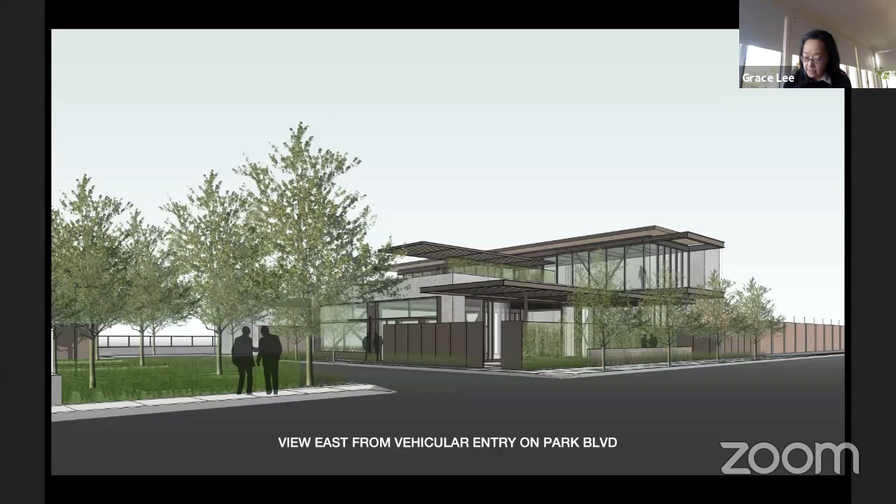Now, on the south, the two-story flat wall, I also don't have any issues—I don't think it's a challenge. Given the transparencies and the massing and everything else happening along the edges, I think that flat wall will work well with the overall design.

However, if you want to pull up that view north from Park Boulevard, I have some thoughts regarding the refuge. I do want to preface that the forecourt and the setback from the sidewalk is very inviting and wonderful, in many ways, both at the vehicular and pedestrian scale.

I often come to the site coming down Lambert, between the Griffin and Aikens, and cross there, walking along that sidewalk, and I wonder about that inward focus on the refuge. I understand as a counterpoint, a quiet outdoor room, that all seems terrific for the program and the users.

My worry is just the solidity when I see the city property, which will likely remain a blank solid wall, as well as the landscape treatment of that metal screen. I know you need the transformer, and you want to screen it. I wonder about how solid that is on the sidewalk, whether there's a way to create a refuge with an inward focus. However, that solidity is not a blank wall that continues, and it's a very short distance, and you have that lovely lone tree. But perhaps your capable landscape consultant can think about that.

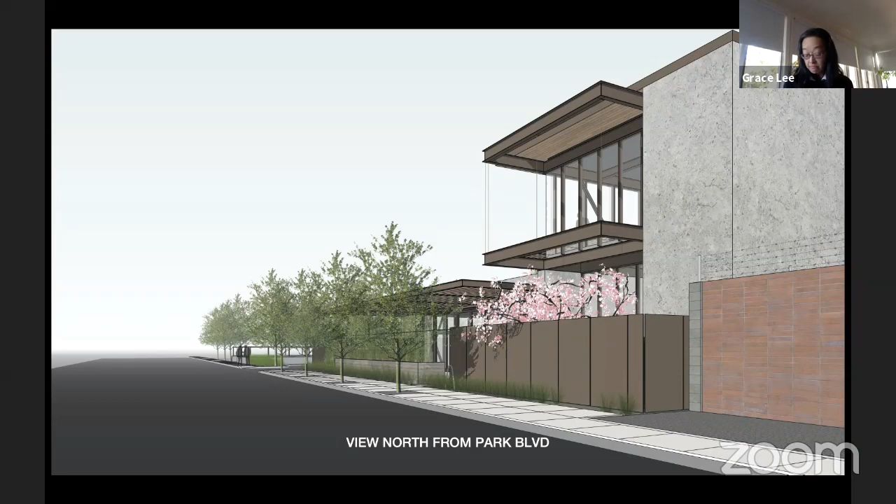And then the last piece, which is very minor, is the trees in the parking lot. I understand how the shading works and that you meet the city requirements, but my small comment is just, why don't we see more evergreen trees in parking lots? Maybe that's just a small thing to consider—in terms of the two deciduous choices, maybe an evergreen choice would be appropriate.

And with that, I will pass it on to Peter. Thank you, Grace.

Okay, that leaves me. I am not quite ready to recommend approval of this building today, although I think it is a handsome design, and I certainly appreciate its landscaping and the way it treats the street better than the previous version. But let me start with my concern about the existing structure.

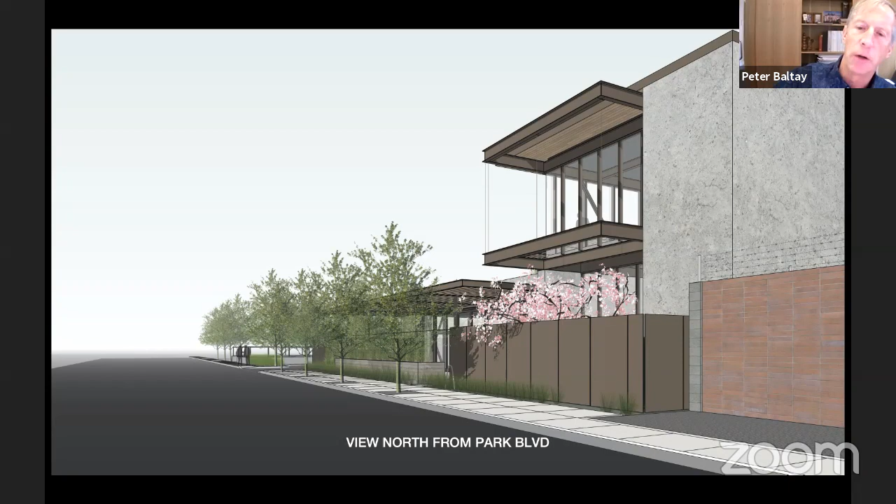I'm all for saving the building and reusing it, I think it's a better thing to do. But I really think it'd be useful if the applicant could investigate more carefully what parts of the building really are going to be saved, and let us know if it really is coming down or not, just for the public record, to make it clear. What seems to be said right now is that everything is remaining, and I just don't think that's going to be the case.

So I would like to see some additional engineering study of how that's going to be accomplished, if possible. I am concerned about the parking configuration for two reasons.

I wonder if the applicant or someone could pull up for me—there's some images in the packet on page 4.1 and 4.2 of what that parking area in the back of the building, between the additional structure and the building, looks like. It's drawing number 4 on packet page A4.1. I thought I saw something in the presentation about that. Are we able to pull that image up?

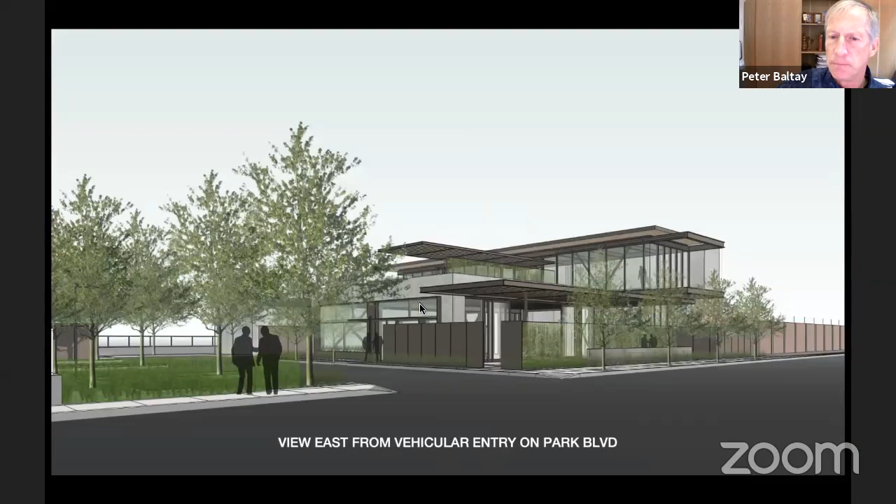Whose screen is this we're sharing here? This is my screen, I was just jotting that note down. What is the content of the image? It's the back behind the new building, between the new building and the parking structure. So is it a 3D view? It's a 3D view, yeah, I saw a 3D view of that earlier. I can share that screen. I have it on my plan, so I'm already at that page. Let me just go ahead and do that—it's in the upper left corner of A4.1.

So what I'm concerned about, there it is on the upper left corner. I'm concerned about two things here. One is that by my reading of the plans, you're including that landscaping trellis cable structure as part of your screening, and I don't think the code supports that. So I think we'll need to just check that.

But secondly, I think that's a pretty mean space, to be honest. It's a 25-foot wide space with no really human activity looking in on it. It's just doors of the parking garage on two sides and a blank wall. Maybe above you're looking down at it, although through the screening.

I think you can do more if you can modulate the building a little bit and get some activity there. And I worry that it's almost dangerous at night. This is a space somebody might be coming out to activate one of these lifts, and there's just no visibility from anybody. I think this could be improved. I'd like to see some work done on the design of this space to just make it fit better somehow.

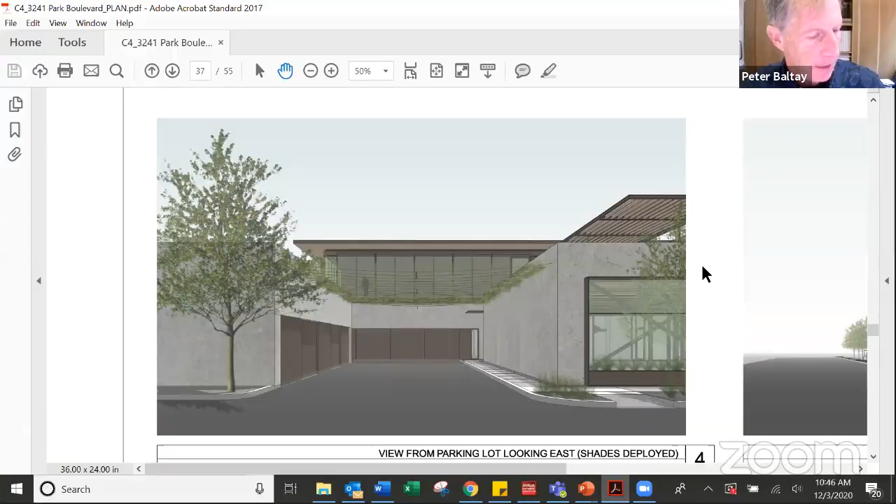Okay, thank you for showing that image. I share the concerns of the staff, I guess, and some of my colleagues regarding the blank wall facing the power substation. I completely agree with the applicant's basic design decision to use that as a partition, a big screening element from inside the building. You clearly don't want to be looking at or orienting towards that electrical station. I get that. But from the public's point of view, coming down Park Boulevard, that wall is quite visible.

And it's really just a blank wall right now. What I'd really love to see is something done along the street in front of the power station as a compromise. If, for example, the applicant were to plant a row of trees down in front of that substation, or if they were to do something with that wall, that would dramatically mitigate the effect of the blank wall of their building. But I think either that is a possibility to explore, or to do something else to the wall of the building, maybe a trim line at the top of it, or some sort of decorative elements.

But I think as it is now, it's just a large blank wall, and that doesn't speak well for anybody, and that will be quite visible. So I just can't support it until something else is done to mitigate the effect of that large wall.

Yeah, okay, if I can speak just briefly to the comment about the trees along the substation. I've been working with utilities on a number of their projects within the substations around the whole city, and their primary mode or function of what they're doing right now is trying to eliminate any sort of means for which individuals will be able to access that space. So a lot of the things that they're doing right now are removing trees or maybe building the wall taller that they have around those substations.